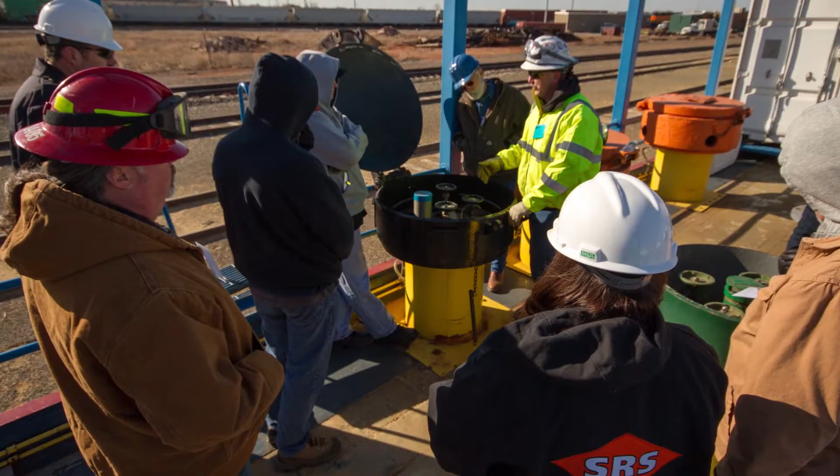As responders who may face chlorine-related incidents, and those who train them, you face many challenges. Your actions must combine a clear understanding of the properties of chlorine and the systems used to store, transport, and carry it. In an emergency, you must act swiftly, effectively, and safely. That is exactly what this program is designed to help you do. Our goal is to give you the knowledge and hands-on experience that enable you to respond to a chlorine-related incident in a way that is safe for your community, your team, and you.

My job involves some of the most exciting work we do in promoting chlorine safety, including our work with TRANSCAER and CHLOREP, the Chlorine Emergency Plan. When I earned my degree in chemical engineering at the University of Tennessee, like many new graduates, I thought I knew something about safety. Later, as a frontline supervisor and incident commander at a manufacturing facility, I learned that hazmat safety requires constant training and a clear commitment to safety by everyone involved in both operations and emergency response. That's why I'm especially pleased to be working with the Chlorine Safety Tour. It involves outreach to people like you who help keep us safe. The members and staff of the Chlorine Institute, thank you for your service.

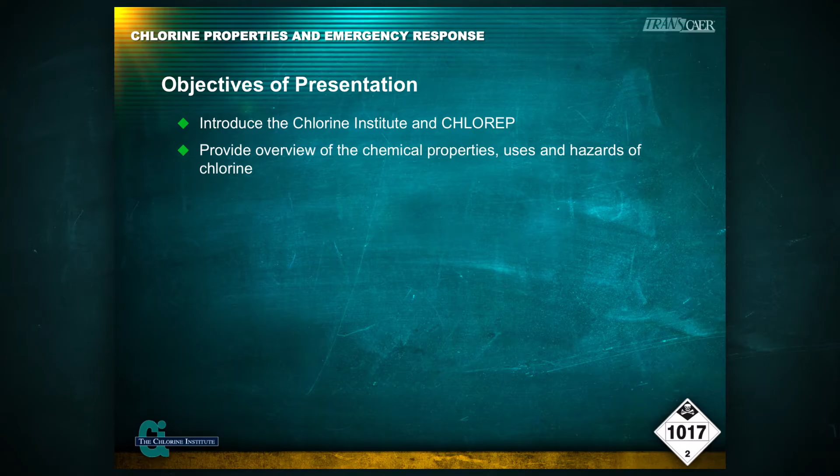The objectives of this presentation are to introduce the Chlorine Institute and the ChlorEP program, so you understand what that is and how that resource can be made readily available to you. It's also to provide an overview of chemical properties, uses, and the hazards of dealing with chlorine, and to provide an understanding of how chlorine properties affect how you respond to a chlorine emergency. Exposure treatment will be covered, along with security concerns when you go to a chlorine emergency site. We also want to provide an overview of the resources made readily available to you in case of an emergency. Remember, when you go into a chlorine emergency, you're not dealing with it alone.

First, I mentioned the Chlorine Institute. Well, what is the Chlorine Institute? It was established back in 1924, and it's a nonprofit technical trade association. It has over 200 members, and it's a worldwide organization, not just North American. It's focused on safety and handling of chlorine and what we call mission chemicals that are normally associated or produced with chlorine, all the way from production through handling, distribution, and final use.

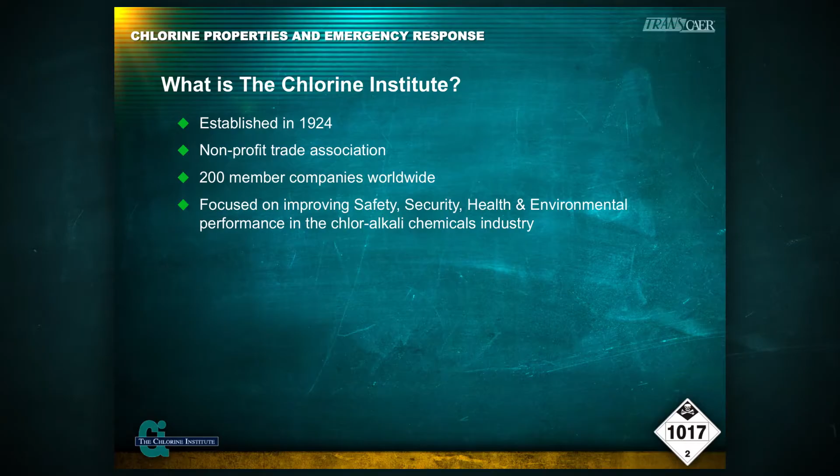Many of these pamphlets are available on their website for a free download. Those resources are available to you from any place you have access from a computer.

Chlorine Institute deals with what is known as the chlor-alkali industry, named because that's how chlorine is normally manufactured. Usually it involves introducing some sort of brine solution, either sodium or potassium, run into a cell and hit with a large amount of DC current, which fractures the molecular bond. It produces chlorine, sodium hydroxide or potassium hydroxide depending on which brine is chosen, and hydrogen. Therefore, you get the term chlor-alkali industry, indicating how it's normally produced in conjunction with sodium hydroxide or potassium hydroxide.

Chlorine Institute's accomplishments are many. One of the biggest things they did early on was to standardize all the chlorine shipment containers. Prior to 1929, manufacturers' containers were all different depending on who the manufacturer was. So the first really big change in the industry was to standardize those containers, which allowed us to develop capping kits for emergency use that could be utilized regardless of who the manufacturer or shipper was.

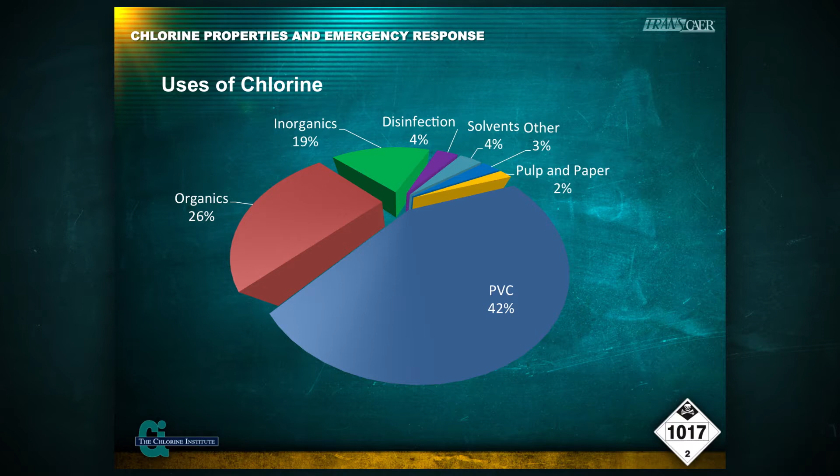But as I mentioned earlier, the bulk of the chlorine produced goes into the manufacturing of PVC. Chlorine and bleach are often used interchangeably by a lot of different people, but they're two very different products.

Chlorine is used primarily in industrial applications, and it's shipped as a compressed liquefied gas in pressure containers. It represents a lethal exposure risk, so it's considered a hazardous material. Bleach, on the other hand, is primarily used for household use or around personnel. It's an aqueous solution, which means it's in water, so it doesn't really have much inhalation contribution. It's basically a corrosive to humans, a very moderate irritant. So keep in mind these are two very different products that have very different response requirements.

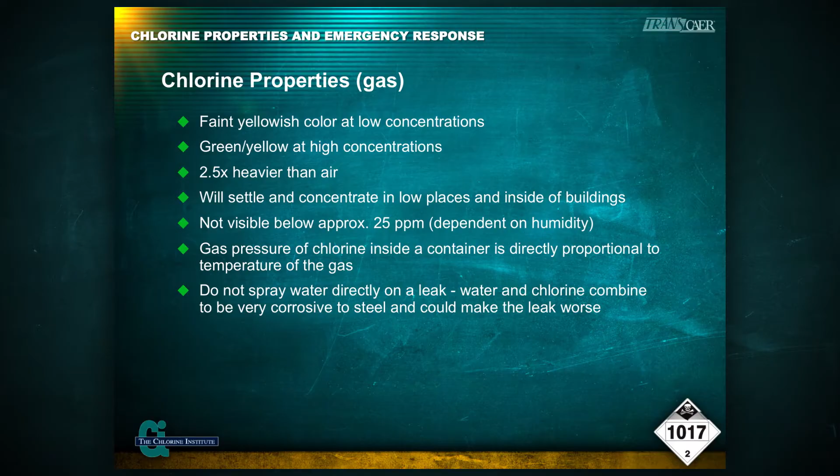Chlorine containers are all made of steel, at least the transportation containers. Hydrochloric acid is very corrosive to steel. If you introduce water on the chlorine source, you've now created a very corrosive environment that's going to make your leak much worse. Another problem you run into when you put water on chlorine is it reacts, and like most reactions, it gives off heat. If you heat the chlorine, it's going to vaporize even more, increasing the problem you have to deal with.

Another thing we'll talk about later in a slide: you really can't absorb much chlorine vapor into water. It's not worth the effort.

I said wet chlorine is very reactive and corrosive to steel. That doesn't mean there's liquid water in that chlorine to get it wet. It doesn't have to be anywhere near that level to be considered wet. Typically, we consider chlorine to be wet anytime it has a moisture content of 150 parts per million or more. Now, that doesn't sound like a lot of water, but you want to remember chlorine is typically shipped with a water content of 20 parts per million or less. Not unusual for it to be at 10 parts per million. That would be what we would consider dry chlorine.

Dry chlorine is actually compatible with most materials like carbon steel, and that's why it can be shipped in carbon steel containers. However, it does react violently with some metals like titanium, aluminum, and tin.

So you want to keep that in mind, that if you're responding to a chlorine leak, you don't want to take your titanium driver with you.

Also remember that chlorine reacts violently with steel at temperatures above 450 degrees Fahrenheit. That 450 degree Fahrenheit number was actually generated in a laboratory, and unless the steel is crystal clean, it lowers that reaction temperature very, very much less than 450. That's why most chlorine producers won't let chlorine get above 200 degrees Fahrenheit. They want to have a large buffer between it and 450.

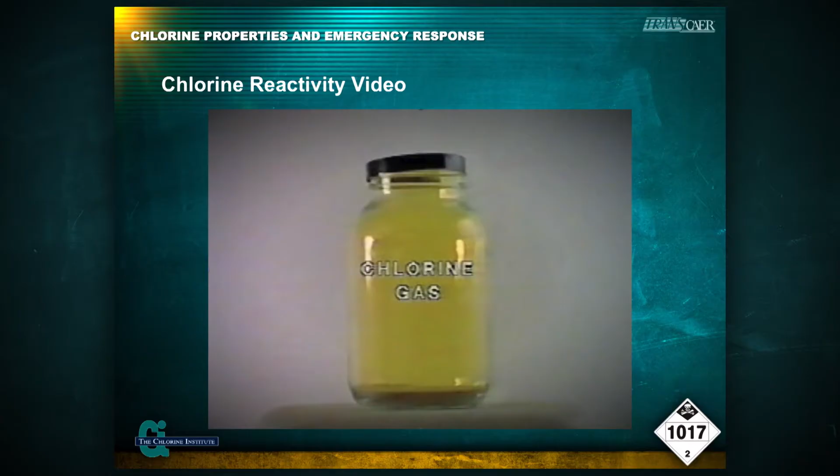Chlorine gas, as I talked about, is a yellowish green color. And here's liquid chlorine, it's an amber color, about minus 29.3 degrees. You'll see the vapor coming out of that beaker is so heavy it will barely clear the top of the beaker.

Wet chlorine is corrosive, as you can see in this real-time video being applied to a steel washer. As far as reactivity, this video here will demonstrate the steel wool and chlorine reaction.

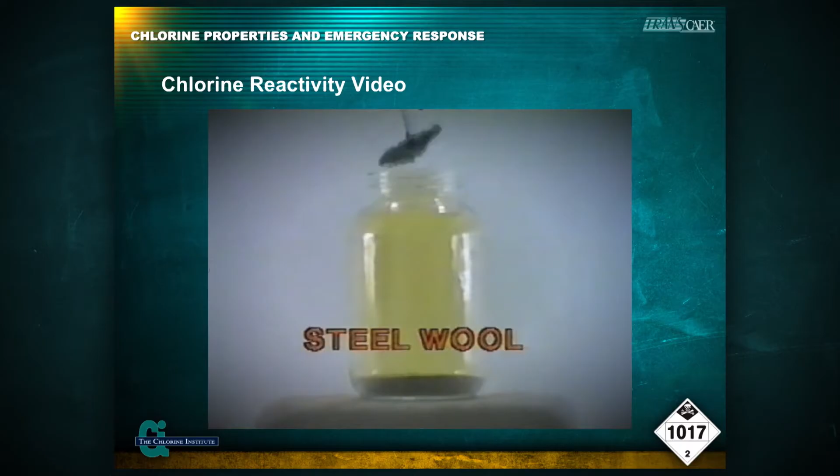The next video is grease and oil. As I said, chlorine is a very high oxidizing material. We test for chlorine leaks utilizing aqueous ammonia vapor. As you can see in the video, it's a rather violent reaction that gives off a lot of white vapor to clearly indicate where those leaks are.

You can actually smell chlorine at as little as half a part per million. You can actually find leaks of chlorine lower than that utilizing aqueous ammonia vapor.

Chlorine reacts violently with hydrocarbon oils and greases. For that reason, any lubricants that are going to be in contact with chlorine have to be fully halogenated greases and contain no hydrocarbons. Also, silicon-based greases and oils will react with chlorine. Detergents and soaps react with chlorine as well. It's one of the reasons also that we use aqueous ammonia to find chlorine leaks and not detergents and soaps.

Chlorine will also react violently with ammonia. That's one of the reasons we use it when checking for chlorine leaks. But we only use the vapor from the aqueous ammonia. We don't put liquid ammonia on chlorine leaks.

Finally, divided metals. We saw the video of the steel wool erupting at room temperature. Chlorine will also react with activated charcoal.

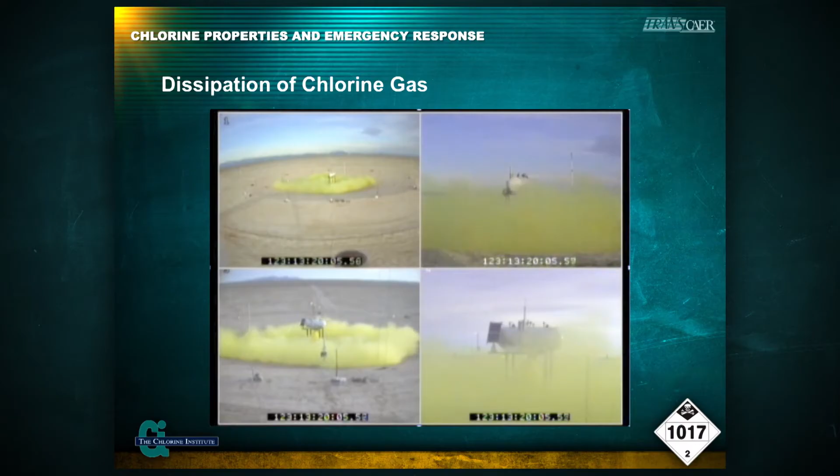Here you can see the chlorine escaping rapidly through the 2-inch ball valve on the bottom of the tank. But you'll notice, if you look at the elevation of the tank, it's barely rising more than about 2 feet above the ground. It's also pretty much staying within the confines of the dished out region around the tank itself.

At the 1 minute mark, approximately, you can see that the liquid is gone from the tank. At the 5 minute mark, you can see a fairly oval outline of a concentration of the chlorine vapor. At the 15 minute mark, it's significantly reduced, but it's still there. If you look at the 30-minute point, you can no longer see any chlorine vapor under the tank, although in actuality, it's very likely still above 10 parts per million, which was the IDLH for chlorine.

It's also interesting that this chlorine stayed at about 2 feet above the ground. To give you an idea how little of the chlorine raised much above that level, during one of the tests, a flock of birds actually flew over the test site and landed on top of the tank and sat there for a period of time. Even though there was a very lethal concentration of chlorine at the bottom of the tank, they showed no ill effects and flew off.

Now we're going to see a side-by-side comparison of a much heavier than air material, chlorine at 2.5 times, versus ammonia, which is only about half the weight of air. Even though both of these chemicals are considered poison inhalation hazards, you can tell by watching the video there's going to be a significant difference in how you'd respond and manage these emergencies.

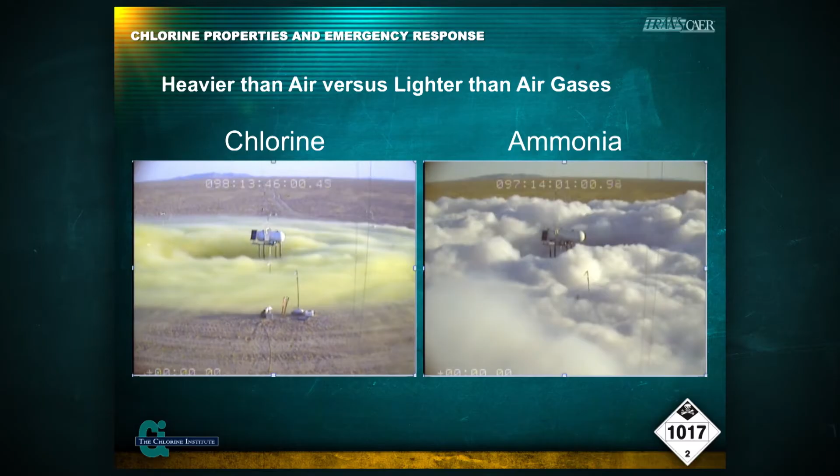The chlorine vapor virtually reaches the end of the dished area and pretty much sits there, whereas the ammonia vapor releasing has engulfed the entire viewing area of the camera, and you've lost view of the tank.

What are the environmental hazards when you're dealing with chlorine? Well, chlorine itself is not actually a naturally occurring element. Chlorine element is never, ever evident by itself. It's always joined up with some other molecule. It's way too reactive for it to remain in its state as elemental chlorine. Most of the time, it's actually tied up in a molecular bond with sodium chloride salt. As a matter of fact, that's how we actually begin the chlorine production process, with salt.

If you mix chlorine with water, as we talked about earlier, you will end up with corrosive hydrochloric acid. So you want to keep that in mind anywhere the chlorine is going to meet a moisture barrier, whether that's dew, fog, or just water.

Whenever you come upon a site where there's been a chlorine release, you want to look for evidence that there's been chlorine contact. One way that's evident is when you look at vegetation, you'll see bleach spots on leafy plants. Even though the plants look like they're under a lot of duress or stress, normally the plant won't die from chlorine contact and will fully recover later.

So what are the exposure limits for chlorine? Well, according to the American Conference of Governmental Industrial Hygienists, the threshold limit value for exposure to chlorine is half a part per million on an 8-hour time-weighted average. The OSHA permissible exposure limit is also 1 part per million as a ceiling.

The conference also says the threshold limit value for a short-term exposure limit is 1 part per million. What's the IDLH for chlorine? Well, it's 10 parts per million. So you see there's a pretty significant difference between the allowable exposure and the IDLH.

Is chlorine considered a carcinogen? No, it's not. Not by OSHA, NIOSH, NTP, or the EPA.

What are the clinical effects from an acute exposure to chlorine? Well, if you're in the neighborhood of 0.2 to 3.5 parts per million, that's considered odor detection. At 1 to 3 parts per million, you're going to notice mild mucous membrane irritation that can be tolerated up to 1 full hour. 5 to 15 parts per million, you're going to have moderate irritation of the respiratory tract.

Now, that term moderate used in that particular measurement refers to how rapidly you can recover from that exposure. Because I can guarantee you, if you're exposed to 15 parts per million chlorine, you're not going to consider it moderate. It's only moderate if it's somebody else being exposed to it.

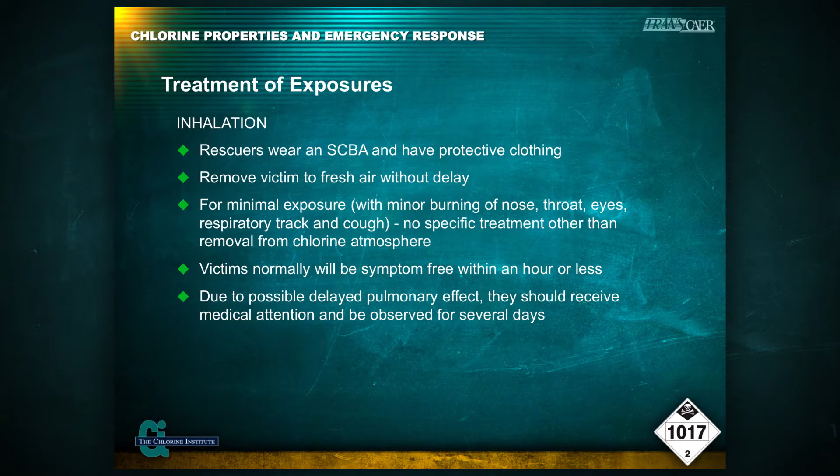Continuing with inhalations, if you've had a more severe symptom from a higher exposure limit, it will typically show up as tightness in the chest, dyspnea, and a persistent cough. The person will normally have a high level of anxiety, and that person's going to have to be treated with oxygen or other respiratory supportive measures because they're not going to be able to breathe normally. They're going to be fighting to breathe and bring air into their lungs.

You want to make sure you get that victim into fresh air as soon as possible and get medical attention as quickly as possible. You want to monitor the victim because they're going to be experiencing a lot of respiratory distress. You want to make sure and check that their airway is open because you can have symptoms of swelling in the throat that can interfere with the normal breathing process. You want to remove any contaminated clothing the person may have on because that will constantly re-expose the victim as the vapor continues to evolve off their clothing. You also won't be able to transport that victim in an ambulance until you get them cleaned.

For skin contact exposure, you want to make sure and wash the skin with plenty of water. This is one place where you actually want to use a lot of water. You want to get that off their skin so you can cease their exposure to the vapor as well as prevent future corrosion burns. You want to get their contaminated clothing off, wash the body entirely, thoroughly, and rinse it. And if they continue to have irritation after you've irrigated them sufficiently, or they have broken skin or blisters, they need to get medical attention immediately.

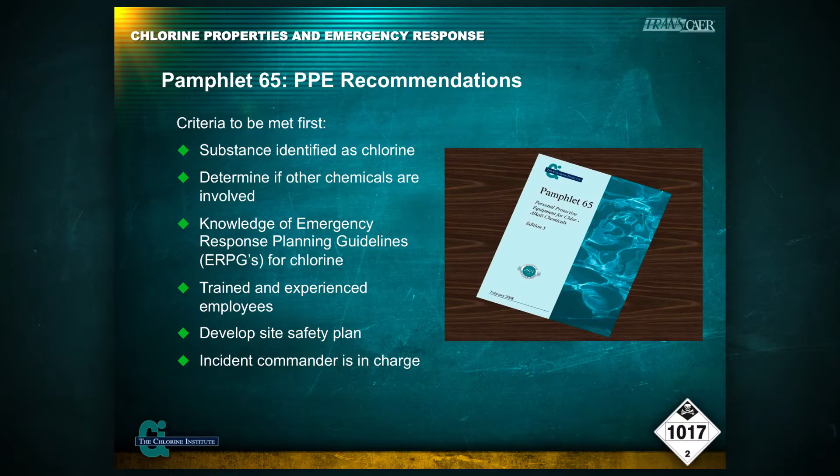Some of the considerations and decisions you have to make when dealing with a chlorine emergency: what kind of personal protective equipment are you going to have to wear to enter. You have to know exactly what state the chlorine's in, whether it's a gas or a liquid phase or some combination of either one. One thing you will have to have on, regardless of which phase it's in, is an SCBA that's under positive pressure. These guidelines are all spelled out in Pamphlet 65, which I mentioned earlier.

If it is a gas or vapor release, you should have on a level B suit that has self-sealing sleeves or taped sleeves. You want to make sure you don't go into confined spaces, though, if you only have on the level B suit with self-sealing sleeves or tape — it's not qualified for that. In a liquid, you want to make sure you're wearing an enhanced level B suit. You want to make sure you have a hood for head and neck protection, and thermal underwear should be worn, because, as I spoke about earlier, liquid chlorine is going to be at minus 29 degrees or less, so you're going to have potential for frostbite.

This slide is probably one of the most important things for first responders to remember: your emergency contact and resources. There are resources available to you when you're dealing with a chlorine emergency. Who are you going to contact? Call Chemtrec. Chemtrec will initiate the ChlorEP plan, and a ChlorEP sector team leader will be responding to you and making contact with you in a very short period of time. Chemtrec can also offer other valuable resources, such as an SDS sheet, so you can look at what you need to do in order to respond to a small leak, a fire, or an exposure. They can also tell you the manufacturer of the product and who the transporter was.

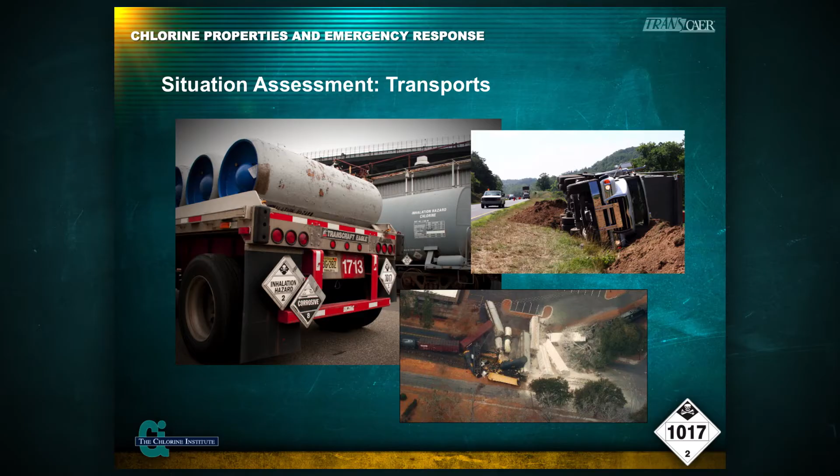Situation assessment can be significantly different when you're dealing with chlorine containers other than rail cars. They can pretty much happen anywhere — on any road, highway, or dirt road. They can be stored at a fixed facility, like a rural water treatment plant. It can be almost anywhere. So you want to make sure you assess the situation and determine what your avenues are for dealing with that release. You also have different kits available depending on what container it is, whether it's a 1-ton container or a 150-pound cylinder.

If you are dealing with a chlorine rail car, keep in mind that a loaded chlorine tank car is only about 80% liquid full. It has a 20% vapor head space to allow for expansion. The pressure in a loaded rail car is somewhere between 60 and 100 psig, depending on the temperature of the chlorine. The product temperature is going to vary in that range, from 50 to 80 degrees Fahrenheit.

If it's a residue car that's returning back to the manufacturer, it's going to have somewhere around 2,500 pounds of a mixture of chlorine vapor, liquid, and air. But that car is going to be pressurized somewhere between 150 and 275 psig. The reason you have higher pressure in a residue car than on a loaded car is that most chlorine cars, when offloaded, use a pad gas to push the liquid out. So the remaining pressure is that pad gas in the car.

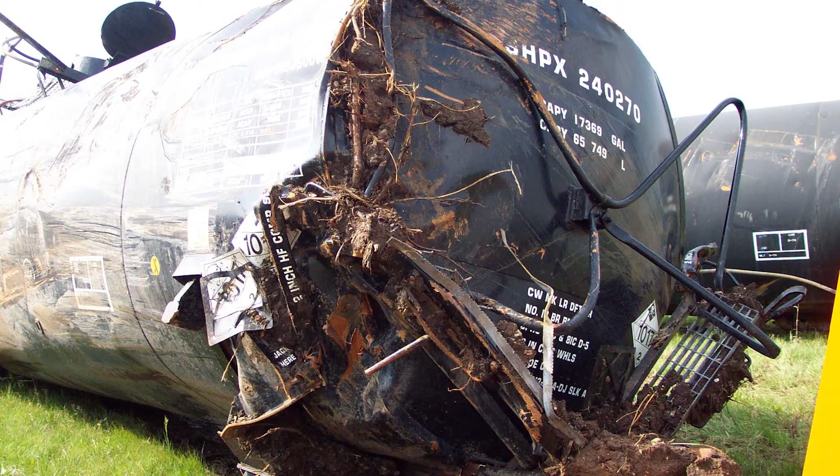Also, here on the bolster, the cradle that this tank car sits in, you don't see where it's welded to the tank itself. You'll see a rain bonnet over it right there, another indication. Again, that's important to know when you're doing your damage assessment. You're going out there to find out what's wrong with this car, because you could just have a dent or a gouge, and it could just be the outer shell itself, not damage to the tank.

When we look at this and get our reference points on this tank car, we have an A end and a B end of the car. The B end is where our brake is, and there won't be a brake on the other side of the car. So everything is referenced from the B end of the car, with a right side and a left side. This way, when you do your damage assessment and call back to your command post, everyone is on the same page referencing where your damage is and what you're seeing.

Tank cars are attached to each other through couplers. Hazmat tank cars use double shelf couplers, so you'll see they're connected in a way that, in the event of a derail, these couplers don't come apart and gouge into the other tank and damage it. You'll notice on this tank car there are no fittings or valves on the bottom. All your valves and fittings are on top of the car, inside protective housing. Here we have the A end of the car.

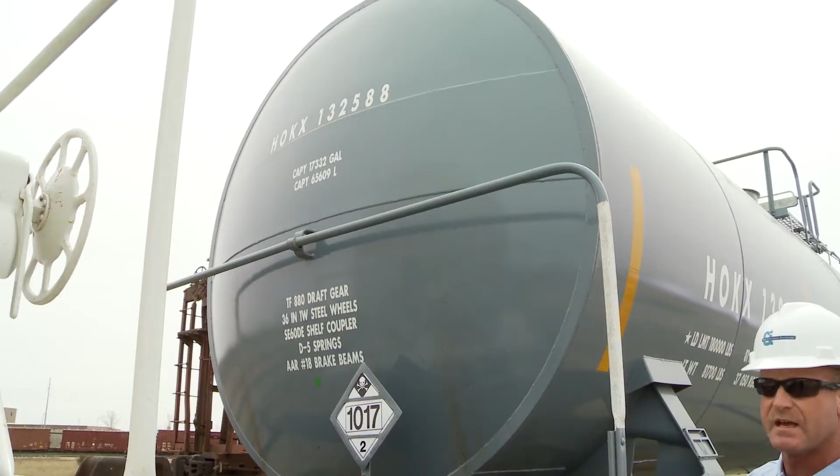You'll notice the absence of the brake wheel, which distinguishes this as the A side of our car for our reference point. Also on the sides of the car you'll see some stenciling and marking, and Tracy's going to explain what those mean to this car.

This number you see right here is the identification number for this particular tank car. This number was applied to this car when it was built, and it will stay with it until the last of time. In case of an emergency, this number could be called in and they could find out who the shipper is and the product that is in the car. Looking at the tank car on the side, the identification number will always be on the left side and on each end of the car. So it's very important to know where that's at.

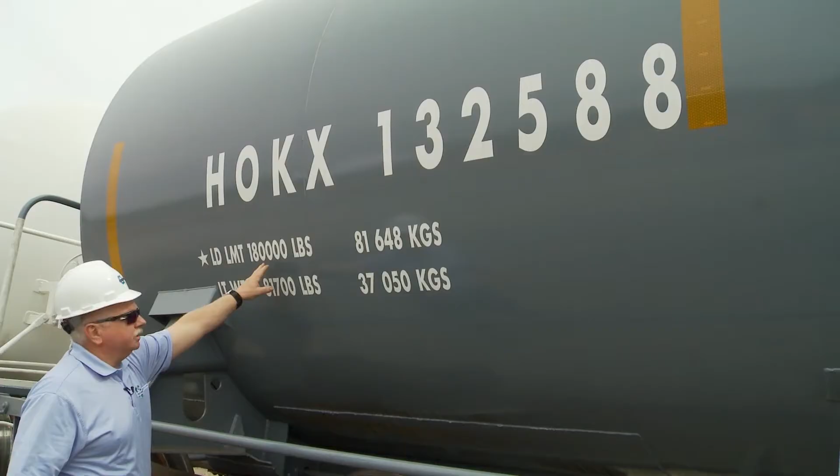Below it is the load limit in poundage of product, 180,000 pounds, usually about 170,000 pounds of product is what they will put in it, as well as the light weight of the car.

As we proceed down the car, as you notice, it's got the markings of the insulation, 2 inches of glass wool blanket over 2 inches ceramic fiber. That's 4 inches behind this jacket, so you have at least 4 inches of space between the outer shell or the jacket and the inside tank.

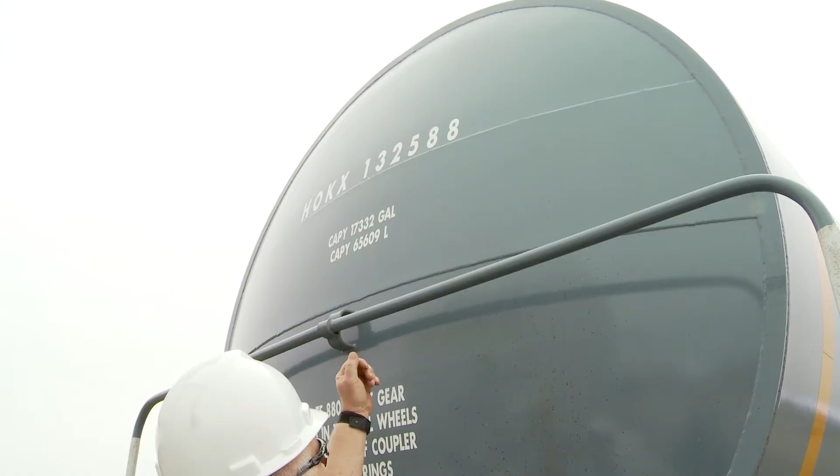We've also got the identification marking of the car on the end. And on the end of it, you see the capacity in gallons and in liters. 17,332 gallons, usually it's about 14,900 gallons. They leave some outage inside the car. That will be on the other end of the car, but they are always on the end. You can see the capacity in gallons and liters.

If you'll notice here, this is the placard for this particular commodity, which is chlorine 1017. It's a class 2, which is a compressed gas liquid, and it will be on all 4 of the sides per DOT specifications.

As we proceed down the car, if you'll notice right here, this is the emergency number to Chemtrec, 800-424-9300. With this number, you could report if this car was in an accident or leaking or what have you. You could call that number, give the identification number that we talked about earlier, and they could contact the shipper and get emergency personnel on their way.

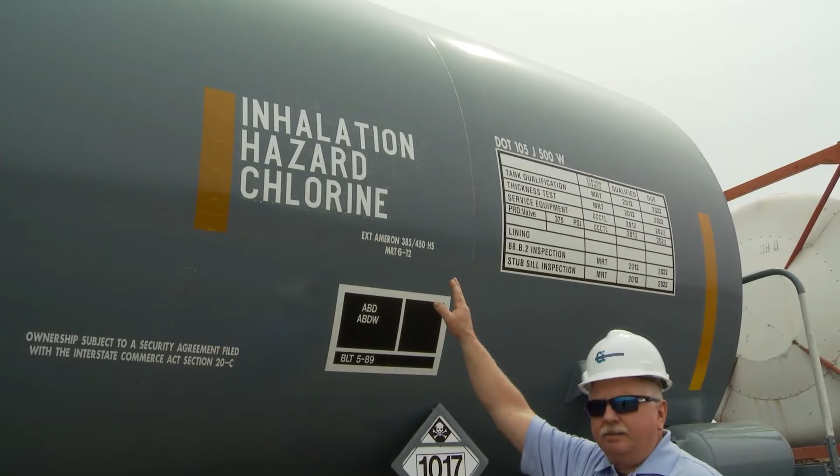This brings us to the right side of the car. And if you'll notice, it has the inhalation hazard, chlorine. You will see that on Chlorine Cars stencil. You will see a built date, which looks like an old-fashioned type chalkboard, and it will have the built date of the car when it was built. Again, you will see a placard on the side, all 4 sides of the car.

Okay, we're looking at the car specification number. This is a DOT, which is the governing body of this tank car, and it's a 105J500W. The 105 designates the type of car that it is, which is used in chlorine, J for jacketed, and then 500 is the working pressure. After 2012 is the next generation car, and it'd be a DOT 105J600, or 600 pound working pressure. That working pressure is what that car could be working at.

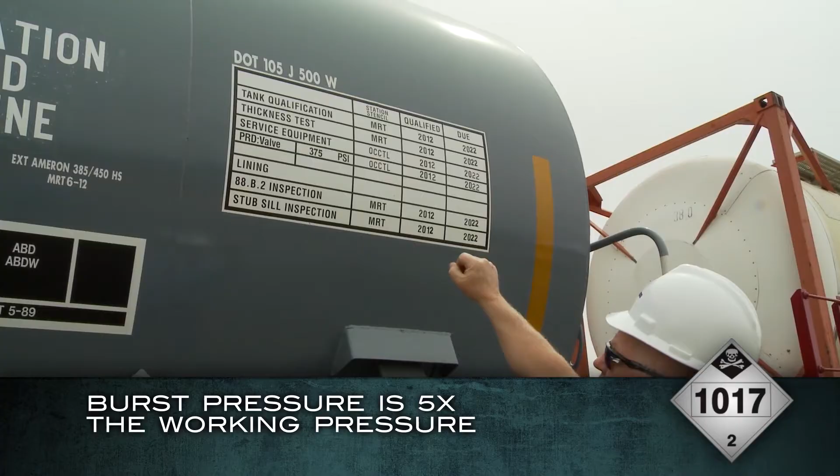However, there is a burst pressure that is 5 times more than that, so that's a pretty good safety factor. When you come underneath that to the qualification outline, it says when the tank was qualified last or tested, the tank thickness test to make sure that there's no erosion on the steel on the inside tank. If you notice the service equipment, the PRD, that's the pressure relief device, it is set at 375 PSI. So that is below the tank working pressure of 500 pounds that you see on the DOT number at the top. There's quite a lot of safety factors built into these cars.

We are now at the B end of the car. As you can see, the brake wheel. Once again, the identification marking is at the top. It's on the end. We talked about it being on the other end, on the A end, and on the left of the car on each side. As you will notice, once again, it has the capacity in gallons and liters on this end of the car. Again, the 1017 placard, it will be on every side of the car.

Now, Terry will go over the protective housing on the top and the valving and how they work.

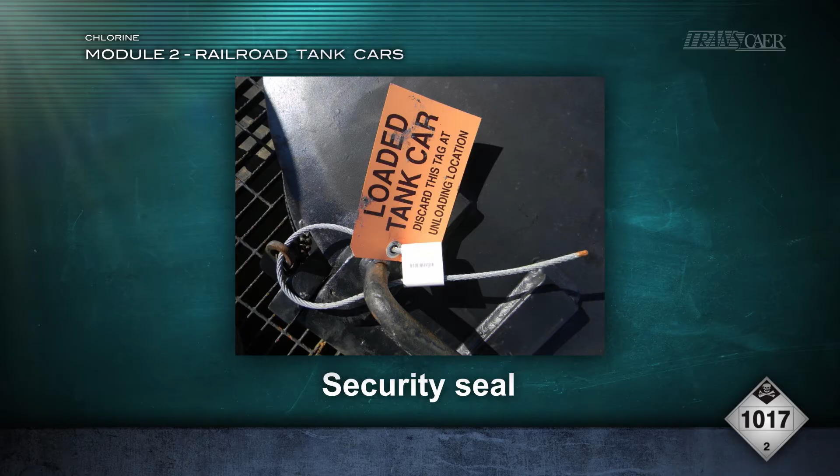Now that we're on top of the car, we want to talk about the protective housing. As responders, whenever we get on top of the car, we want to make sure the seal is intact. The seal is always placed on the car after the car has been loaded. We want to make sure that seal has been intact, is still intact, and that we have not had anyone cutting the car prior to us mounting on the car.

The liquid valves running lengthways will have an eduction pipe located underneath the pressure plate, right under the angle valve itself. On the pressure plate, attached to the bottom, will be what we call an excess flow valve. Excess flow valves on most tank cars are 15,000 pound per hour excess flow valves. On the bottom of the excess flow valve is an eduction pipe connected to it that travels down inside the car within 2 inches of the floor for liquid removal.

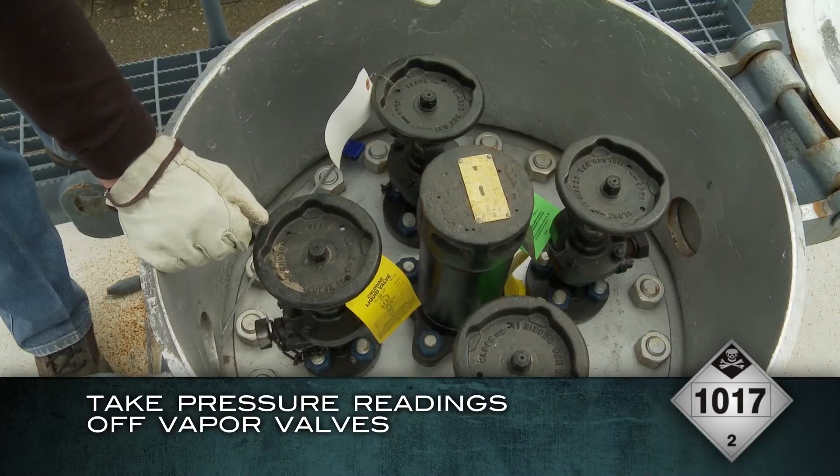The vapor valves will not have eduction pipes or excess flow valves on the tank car. As for the pressure relief device, again, it's set at 375 PSI. When coming up on top of the tank car to take pressures off the tank car, we usually take them off of the vapor side so that we get a pressure reading before trying to fix something or apply the kit.

The next generation protective housing that you'll see, built after 2012, is on some of the cars that are getting more prevalent nowadays. You'll see that it has 3 angle valves with the safety relief device offset and not in the center of the protective housing itself.

Prior to releasing the car or shipping the car back down the rail, we want to make sure that these things are intact. All 4 plugs are located inside the valves and they're secure and they're tight. We want to also make sure that the tags are still on the valves if we need those paper tags. Also, very important that we take the returning seal, the RA seal, and place it on the car itself once we have closed the lid.

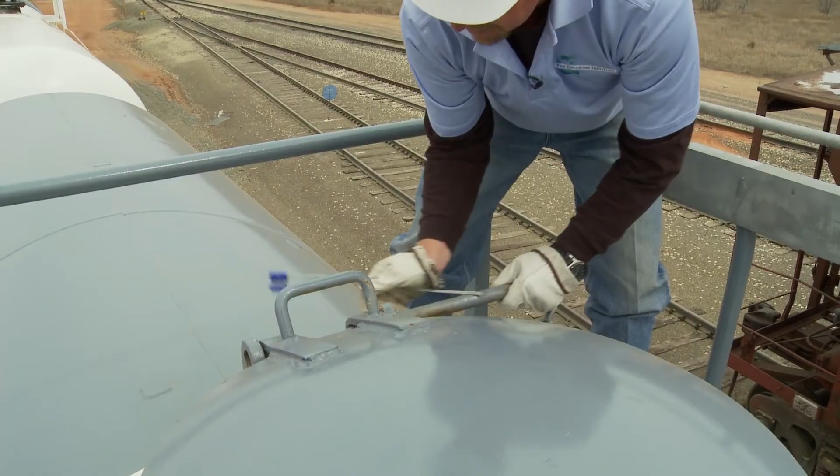Replace the pin for the lid, and then we want to reseal the car, and then document or record the number on that seal, and then your car can be released.

U.S. railroads transported over 1.7 million shipments of hazardous materials last year, and 99.96% made it to destination without incident. Railroad is an extremely safe way to transport hazardous materials, and very few times do we experience problems in that supply chain. When accidents do occur, it's important to understand that as a responder, you're not in it alone. The railroad has many different resources that we will send to the site to help you deal with any type of emergency response that you have on the railroad.

Some of the things I want to cover in the objectives of this are to talk about some of the things you'll need to do, which is contacting the railroad, assessing the situation, and being able to engage the resources that are available to you.

It's important when you're responding to a railroad incident that you call the railroad. It's also important that you pre-plan before you have an accident in your jurisdiction or city to understand whose railroad might be running through your area. So when you have a call, it could come through 911. The railroad may or may not know that there's an incident occurring right there. So what you can do is call the railroad, explain that you are responding to the incident, and then give them all the pertinent information about that incident, like where it is. How are they going to know where that incident is? You need to explain it to them.

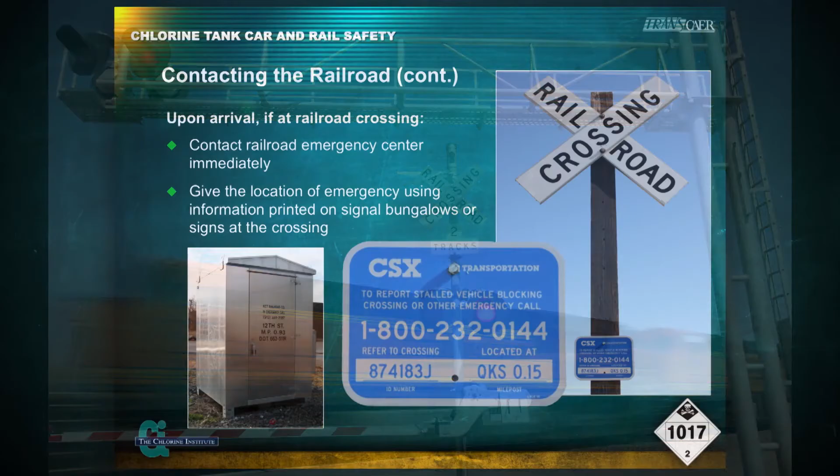Around those crossings, there will be a silver small building called a signal bungalow, and on that building there will be information telling you whose railroad operates that crossing. It also has a 1-800 emergency response number and a DOT crossing number, which is a serial number specifically assigned to that crossing. There's only one crossing in the United States with that number, so when you call in, you can identify the crossing by that serial number, giving the responding railroad exact information of where you are.

It will also say M.P. with a number, which is the milepost number. That number does not coincide with DOT highway or interstate markings; it's a sole milepost marking used only by the railroad, even if the track is adjacent to an interstate or highway. So when you have an accident at a grade crossing, it's important to look for all these identifiers and find this information.

If it is a railroad crossing that does not have automated arms and flashing lights, look for a blue sign on what we call the crossbucks, the X symbol that says railroad crossing, which has all the pertinent information of the railroad. It will have the 1-800 number, your unique DOT serial number identifier, and the milepost. Those are important features to find.

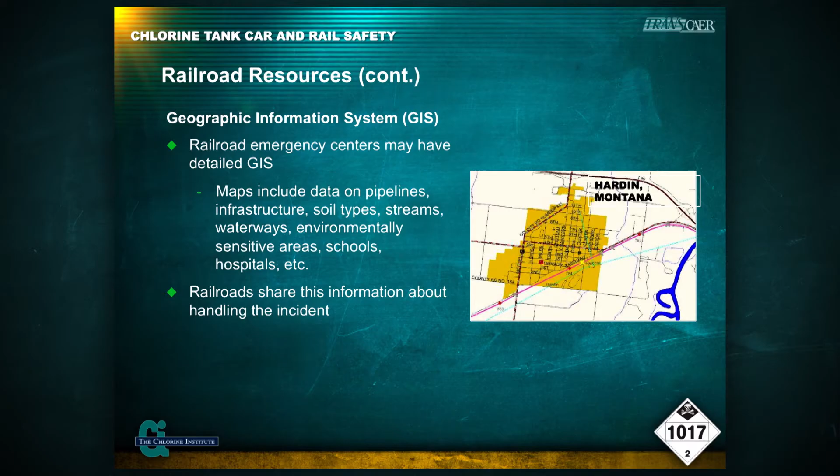Many railroads have geographical information systems, or GIS systems, which are overlays that can be put on a map showing sensitive environmental receptors, water intakes for communities, schools, hospitals, pipelines, and underground utilities. When you're talking to the emergency response center for whatever railroad you're working with, they can really help you, especially if you don't have that information readily available, telling you about things like water receptors or sensitive environmental receptors.

Railroads also contract with independent contractors and government agencies that can help with plume dispersion modeling if there's a suspected or verified release of chlorine. These contractors have good computer programming methodologies that use real-time meteorological information to give you very good plume dispersion modeling, helping you anticipate what the plume could look like or how it will progress through your community.

Some resources the railroad will provide to an incident include our engineering department, mechanical department, and transportation department. We will also supply hazardous materials contractors, security, environmental contractors, and industrial hygiene contractors. It's important to remember that when responding to a hazardous material incident on the railroad, you use all the resources available. When assessing the situation, it's important to do so from a distance, using your binoculars to see the conditions you have.

Do you have visible signs of a leak? That's going to be vapors, smoke, or liquid coming out of a car. So you want to visualize that from a safe distance first.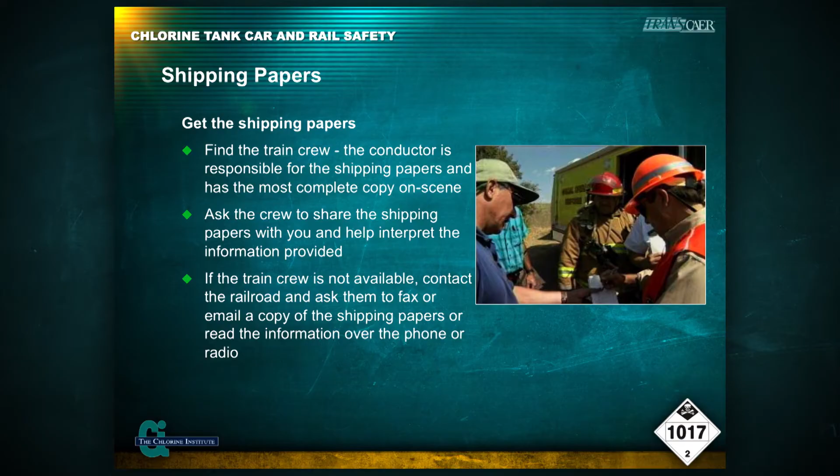If you have a derailment, one of the easiest ways you can start is to find the cars that you can identify that are in the upright position. Find those cars on the train list, and then you can work from there to help you figure out what part of the train has derailed.

Some of our trains carry 100 cars, so trying to count cars from the locomotive to the rear of the train can be very burdensome. So what you want to try to do is find the cars that are upright, go from there, and that'll give you a good spot on that consist to start working and trying to identify the cars that have actually been derailed.

All right, so let's look at the shipping papers. Once you've obtained the shipping papers from the train crew, you can identify your hazardous materials cars in those shipping papers. Those cars are in sequence, and the cars will be either listed from the front of the train to the rear, or from the back of the train to the front.

If the cars are listed from the back of the train to the front of the train, it will be noted on the top of the consist. Okay, so it's important to understand which direction that you're looking.

Now, that consist will tell you the hazardous materials cars, and they'll be identified by a box with asterisks around it, and it'll say hazmat or give you another type of indication that it's a hazardous materials car. In there you'll find your quantities, your hazardous material, your packing group, your UN number associated with that, your shipper, and consignee.

We'll look at this shipping entry. It's for a chlorine car that has 166,500 pounds of chlorine. You can see here that it shows the UN 1017 placard that would be on the side of the car. The class is 2.3, which is compressed gas, poison. And you can see where the emergency response numbers are.

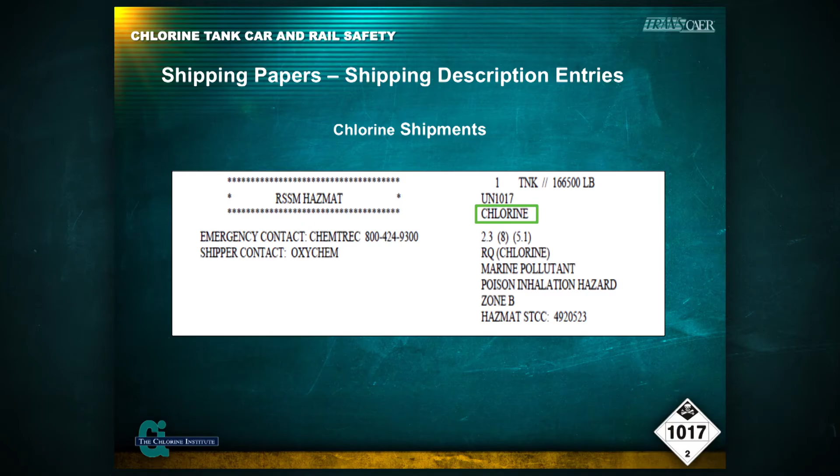So what this does for you is when you're looking at that car, maybe it's either leaking or has been derailed, you can verify that information because you're going to look at your unique identifier number that's been talked about earlier today, the letters and initials on the car, and then you're going to look for that placard to make sure it reads the same thing as the placard on this manifest. You'll start looking at these different pieces of the puzzle to make sure that they're all making sense, that the car you're looking at is actually the car on the manifest that you're reading.

It's very important to understand that the car that you think you're looking at is actually the car that's listed on the manifest, and that the product is the right product, and you're not mistaking one car for another. The next entry talks about a car that's got residue last contained.

It's got the same information, but it's important to see that the residue last contained is on there. When these cars are residue last contained, it does not mean that they're empty. It means they have residue, so they can have 7% of what the load is left in them. So when we respond to those type of cars, it's very important to know that you're not dealing with an empty car. You do have a residual amount of product in those cars.

At the back of the consist, we have emergency response information. This information is not an MSDS or SDS. This information is information that you can read about each one of the hazmat shipments in the train, and it gives you some good general information to go with. It'll give you visual clues. In the case of chlorine, it'll talk about it being a greenish-yellow cloud.

That will help you identify when you go to a response to start looking for that kind of material. It'll give you the weight of the product, and tell you if the vapors are heavier or lighter than air. That'll help you position your equipment or know where to look with your air monitoring devices.

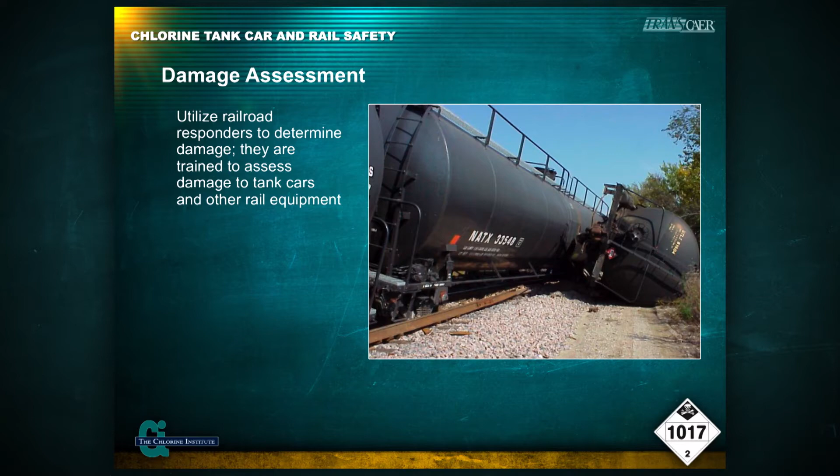When we talk about damage assessment, it's very important for us to understand it. Damage assessment needs to be done by people that are trained and have experience. True damage assessment cannot be done with a pair of binoculars from a distance. It needs to be done up close and personal with that rail car. Responders need access to the site so they can do proper damage assessment, because doing it from a distance just doesn't work.

So here again, as a responder, you're not in this deal alone. We have people coming to the site to help you do damage assessment, and they've got a lot of experience and training. When we look at damage assessment, we look at all kinds of things that play into the equation: when the car was built, the type of car we have, and other conditions like train speed.

And even the geographical terrain that we're in. A derailment in a swamp can be a lot different than a derailment in a canyon, and the damage that's done to the car. So those are some of the things that we look for.

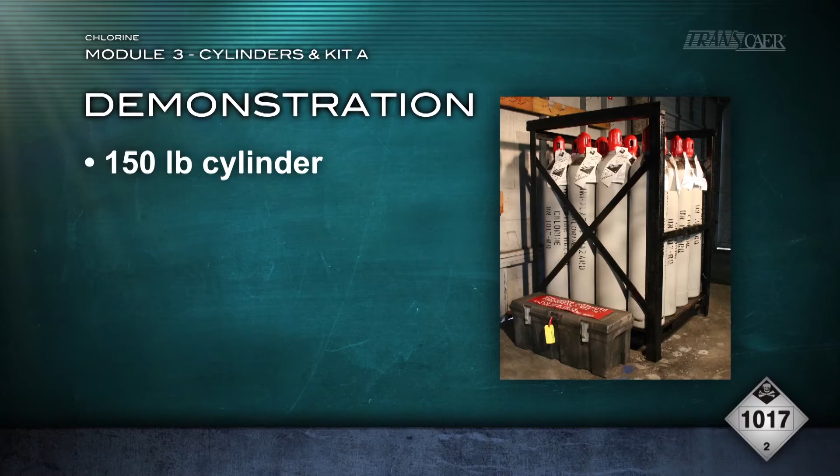Today, for Module 3, we're going to be discussing the chlorine cylinder and also the ton container. We're going to discuss the A kit, for the cylinder, and the B kit, the emergency capping kit, for the ton container. Throughout the segment, I'm going to focus on 3 major elements: the cylinder proper and its characteristics, where we'll get into specific details; then the valve and its properties, where we'll pay a lot of attention to typical leak points, because a lot of times the capping kit should be used as a last means of defense, since typically what we find is that the valve is just cracked open. I'm going to demonstrate that throughout the segment.

And lastly, if we do need to apply the kit, I'm going to demonstrate how to properly apply it.

There are 3 types of cylinders. The 150-pound cylinder, as we see here today, is the most common. But there are also 100-pound cylinders, slightly smaller, and a third that's not as common, a 20-pound cylinder. The 20-pound cylinders are mainly used in the pool industry and aren't as readily available throughout the rest of the industry. The 150-pound, however, is mainly used specifically for water treatment facilities.

The type of cylinder is a carbon steel cylinder. The DOT classification for the cylinder is either a 3A480 or a 3AA480, and all the information can be found on the neck ring. It's very important to know that.

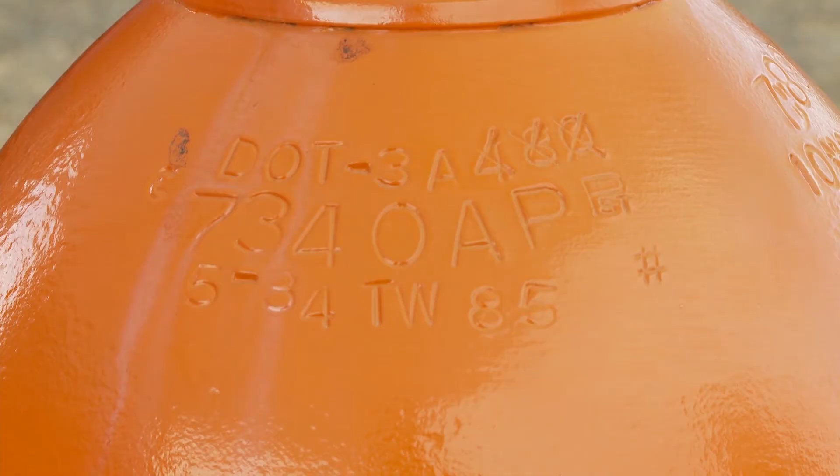Color itself is not a good indication of the contents within the cylinder. Please never rely on the sole color as your last means of defense to determine or identify if this is really a chlorine cylinder or not. The one today is obviously a training cylinder, but there are blue cylinders, gray cylinders, red cylinders. It all depends on the actual supplier and their preference.

We'll talk about the weight. For a 150-pound cylinder, which is the tallest cylinder, an empty weight typically is between 90 and 100 pounds. So without 150 pounds of chlorine inside, it's a pretty heavy vessel in itself.

Some of the other markings you will find would be the test criteria for the cylinder. Once every 5 years, each cylinder has to go through a Department of Transportation, or DOT, requalification. Within this, the cylinder is filled with water—that's one of the test methods—and it's charged with air up to about 800 pounds of pressure. What you're really doing is testing the elasticity of the steel. You want the steel to actually expand and contract, which is critical. Once requalified, it receives a new test date, and all that data is found on the neck ring.

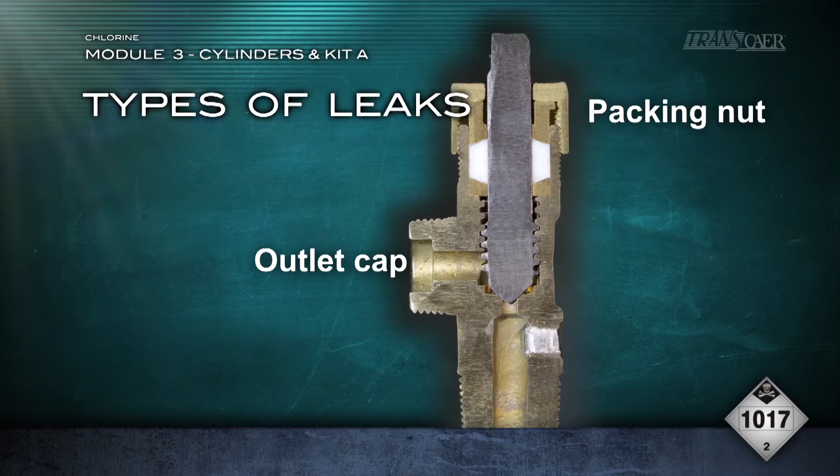Another leak point is through the valve outlet cap. Again, with the A-9 wrench, we could tighten the cap and see if that works. With the valve cap on snug and tight, we could open and close the valve stem to try to dislodge any material that may be sitting on the valve seat, and then check it again with aqueous ammonia. It's very important, anytime you're dealing with chlorine, that you only use aqueous ammonia to test for leaks, not the liquid.

Another leak point is at the threads from the fusible plug itself. It could be the fusible plug. The fusible plug is designed to melt, that's its purpose. Unlike a ton container, which has 6 of these fusible plugs on the vessel itself, the cylinder doesn't have that. We already discussed it. So this is the only source of a pressure relief device for the cylinder.

Now, unlike other pressure relief devices that are spring-loaded and operate on pressure alone, this doesn't work that way. It operates by temperature. So for example, if the cylinder happens to be near a heat source such as a fire, the fusible plug will melt between 158 to 165 degrees Fahrenheit, releasing the pressure, because as heat builds up, pressure builds up inside the cylinder. Instead of a catastrophic failure, the link will melt and release the pressure.

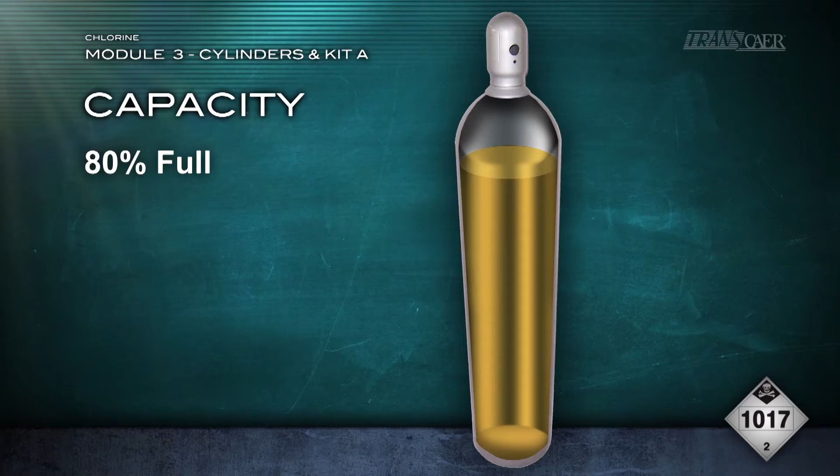Now that leads into the capacity of a full cylinder. A full cylinder is considered to be 80% full, that's what we consider full. The other 20% space is left there intentionally by design for expansion, since as temperature increases or decreases, so does the liquid inside the vessel. Typically for a 150-pound cylinder, if we convert that to gallons, that 150 pounds of liquid chlorine is roughly about 12 gallons of elemental or liquid chlorine.

Finally, the other leak point on the valve would be at the threads of the valve and the cylinder neck. I do not recommend that we retorque or tighten the valve into the cylinder if we find the leak source is at the threads. There are tools in the kit to do that, but it's a more specialized event, and the additional training a person would need is to make sure he checks the condition of those threads.

We just don't take it for granted that if the leak point is here, the threads on both the valve and the cylinder are in really good condition, because the last thing anybody wants to do is tighten the valve further into the cylinder and then end up with the valve in one hand, the cylinder in the other.

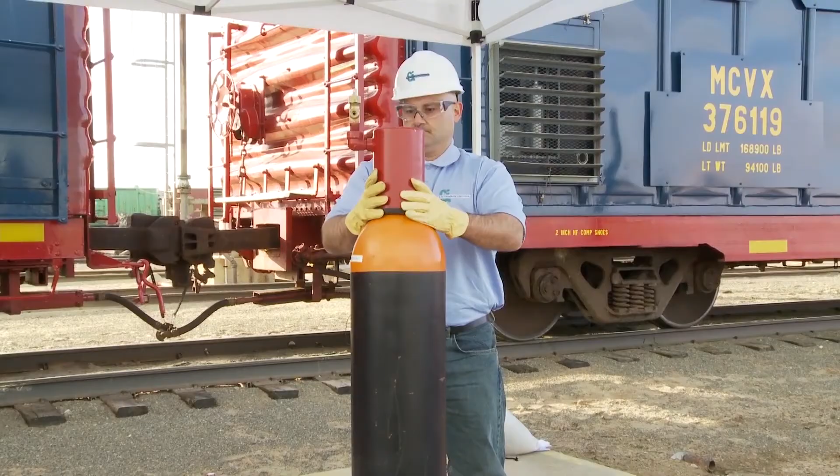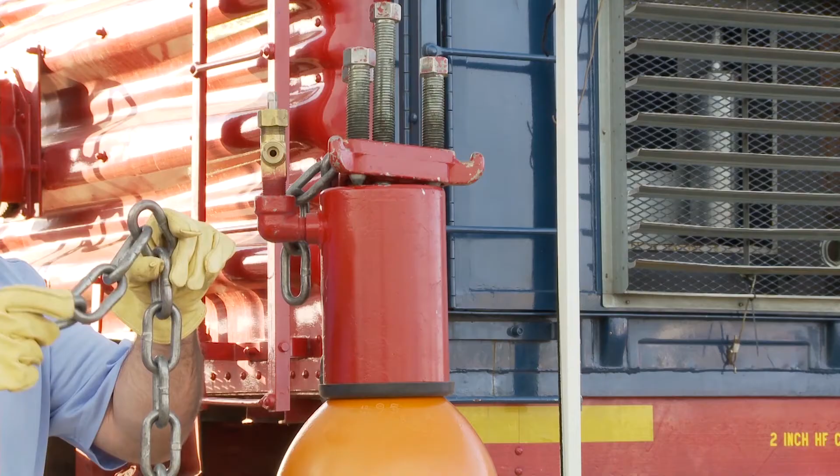Try to keep the vent valve opposite where your work area is. It's important to keep the chains as straight as possible. And one of the tricks is to count the excess links so you keep them all the same as you go around through all three.

You would twist the center bolt only, and this is going to take up the slack of the chain. If you try to work with all 4 bolts, you'll never get it centered. So the center bolt already did its job, and now I'm going to finish the compression using the remaining 3.

As you notice, the 3 are tight, but the center one is loose. That's okay. You would then close your vent valve. At this point, you want to tighten the bolts just enough to stop the leak.

You do not want to over tighten the bolts, because there's enough torque to where you can cut the gasket, and then you would have to start all over again. So we would wait about 5 to 10 minutes, and then we would go back and check using aqueous ammonia to make sure that the leak is contained.

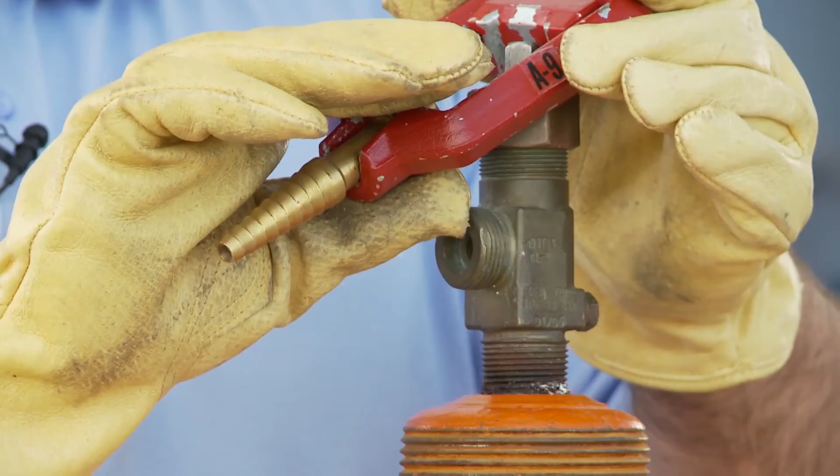It has a gasket, and you would just insert that like such. A hose could then be connected or inserted into the end, and it would typically go into an alkali solution, so a weak caustic or some kind of bicarbonate solution.

In the event that the valve stem or the valve itself actually blows out of the cylinder, very rare, but this kit does contain components to correct that. So part A3 would be used if the valve stem blows out and the valve body remains intact, and you would just insert it and you would tap it using a hammer.

And if the valve itself is removed for some reason from the cylinder, there's a part A4, and it would serve the same purpose. Utilizing the hammer that's within the kit itself, you would just tap it down, and it would replace the valve.

Next, we're going to discuss sidewall leaks. Sidewall leaks do happen, but what's important to remember is that there is a device, number 8, within the A kit that will contain the leak. It's important to note that the amount of pressure applied on device 8 follows the golden rule of thumb: you only apply enough pressure to stop the leak. Because if there is a sidewall leak, chances are the actual cylinder wall may be compromised, and the last thing we want to do is collapse the wall and introduce a bigger leak.

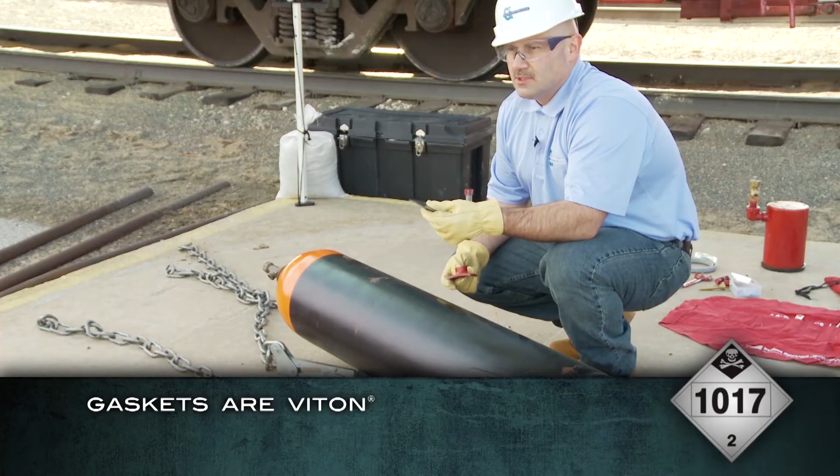The leak is at the 12 o'clock position. There's a gasket, and it's very important to note that the gaskets used for chlorine emergencies are made out of Viton. It's important that the material of construction is Viton -- that's what's within the A kit itself. For SO2, some kits actually have EPDM gaskets, but they're gray in color; Viton is black. Part 8D, which makes up device 8, has a contour shape to it, and it's important to apply that with the shape of the cylinder itself.

It's easier to set this apparatus up just near or adjacent to the actual leak. It's harder if you try to assemble these components directly over the leak, because that pressure may blow out your gasket. It just makes life more complicated -- life's complicated enough.

Now you would take up some of the slack, just make it slightly hand tight, because you still want to maneuver this over your leak point. By pinching the four corners, you can hold the gasket and device 8B together, and you would just slide it over the hole.

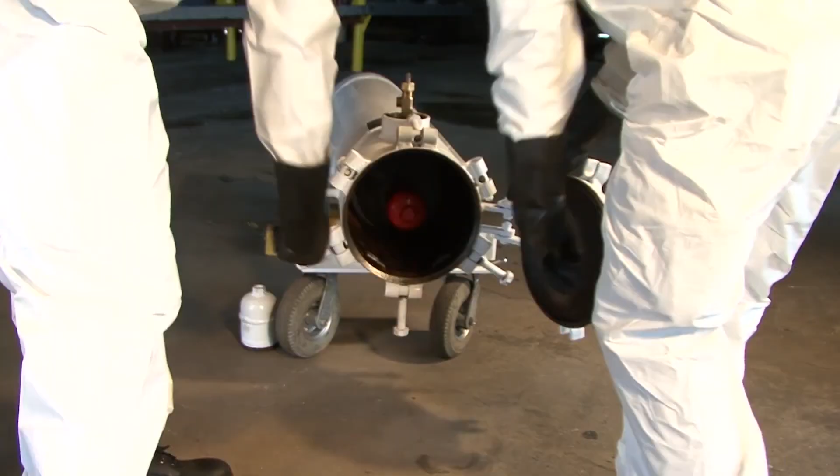Earlier we had discussed the salvage vessel, or recovery vessel as it's known. The recovery vessel is a particularly important piece of equipment when you have a situation involving a bottom leak. It's very easy to just slide the cylinder inside the vessel and close the doors, and the incident is basically mitigated. You would then contact a supplier, and that vessel would be taken over to the supplier and the cylinder evacuated at that point.

One of the changes adopted this year is a new variation to the A kit. While you may be very familiar with the A kit of the older design, we do have a new design adopted by the Chlorine Institute that looks just like this. Instead of having to put your top yoke on, your chains basically hook right here, making it very simple to operate.

Basically, you hook all the chains on there, and instead of having to line them all up together, they're all independent of each other, and you can tighten it to get a nice even seal. Make sure you've got a clean link. Once you have your chains hooked on there, you can independently adjust them. One of the big features is it goes up and down on the threaded rod to make it nice and tight. It works with your standard wrench.

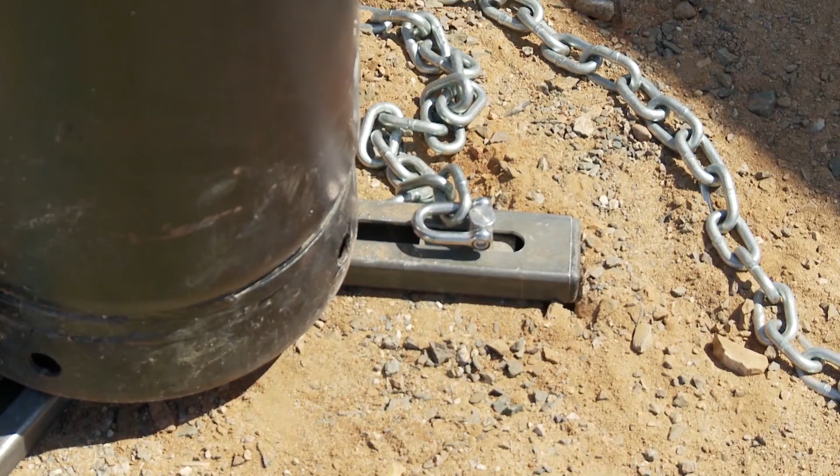You also have adjustments that let you get it nice and tight. One of the advantages to this chain is if you wanted to put it on a short cylinder, it will still work on the short cylinders, as well as 100-pounders and smaller containers than that. That is a big advantage to this new generation kit.

Another change in the newer kit is the side patch. Historically, you put the square patch on there with a chain, over tightening the chain. When you have a pinhole in a cylinder, you could have the possibility of line corrosion, which would look like a bathtub ring inside the container, and you may see a pinhole there. In this case, one of the big changes instead of the chain is using a strap. The strap will disperse your tightness over a bigger area than just the chain.

One of the changes is the gasket design. It's about 3/8 thick, and you have a little cup in there. That little cup will allow you to place it over and disperse some of the pressure.

Simple hookup. Instead of having to use a wrench, you have a knurled knob where you can just turn it by hand, and stabilize it with these two little stabilizing knobs.

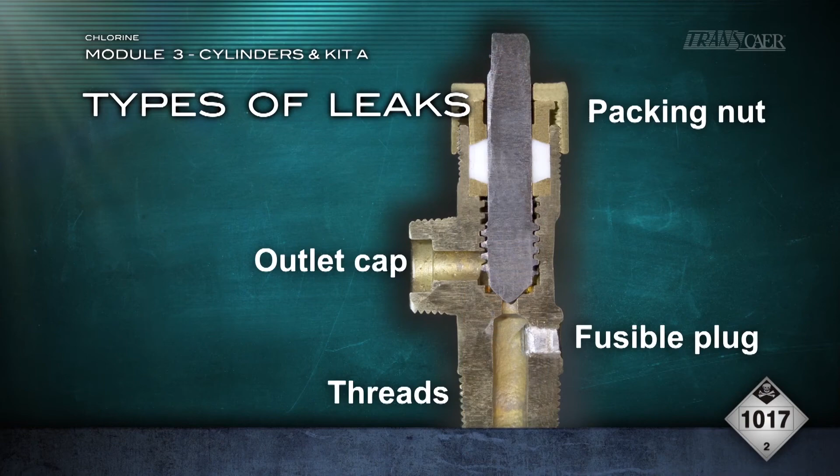But please always remember that help is a phone call away - whether it's the supplier, and we discussed how to identify some of the markings or numbers on the cylinder itself. You could also call CHEMTREC, and through CHEMTREC, the Chlorine Institute and the CHLOREP network would be activated to assist you. So you're never really by yourself.

I'm going to talk to you today about the ton container, very common in the water and waste treatment industry, as well as the emergency B kit, which is used in the case of a leak on a ton container itself. The ton container is about 82 inches long, 30 inches in diameter.

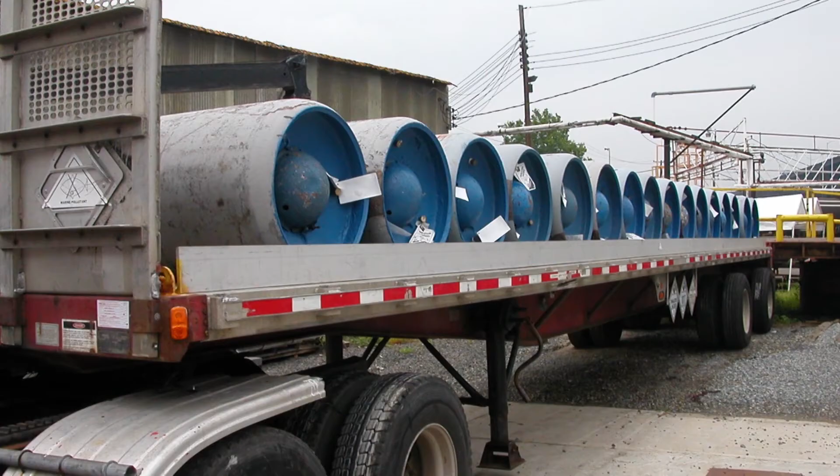It has two concave sides, one on this end, one on the back side, with 3 fusible plugs on each side. Fusible plugs are designed to melt out in lieu of overpressurizing the container itself.

There are 2 valves, a top valve and a bottom valve. There's a little chime area right here which has a bunch of information on it - tare weights, test dates, that type of thing. A lot of people consider that the top of the ton, but in essence, as long as one valve is in the 12 o'clock position and one is in the 6 o'clock position, the bottom valve is always designed to deliver liquid chlorine, and the top valve is always designed to deliver gaseous chlorine.

The ton container has 2 eduction tubes. The bottom tube is designed to deliver liquid, the top valve will deliver gaseous chlorine. A full ton container with 2,000 pounds of chlorine in it is about 80% full. The liquid comes to within a 1/2 inch of the top, so you can see how it would deliver gas, and this would always deliver liquid. Basically, that's what the inside of a ton container looks like.

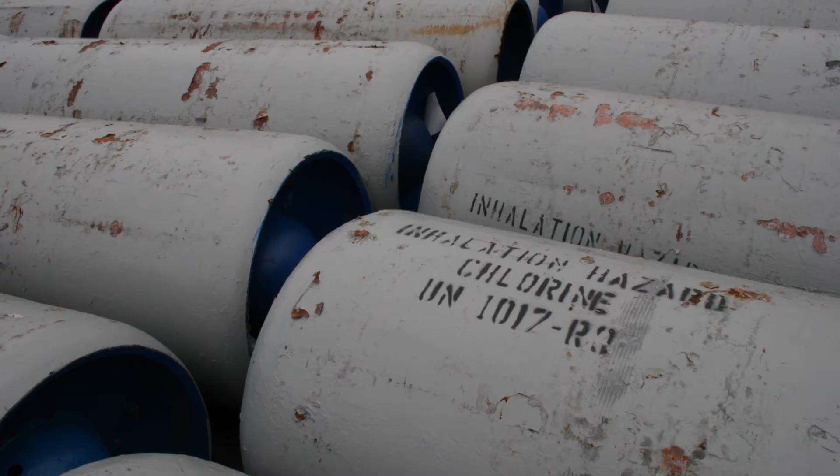In the chlorine industry, we call this a chlorine ton, but the Department of Transportation calls it a DOT 106A500. The point being, this container can be used for multiple gases - you just can't look at it and assume it's a chlorine ton. The same container is used for bromines, sulfur dioxide, and a whole host of other gases. The important thing to remember is to look for your stencil, labels, bills of lading - those type of things. You can't just assume automatically that it's a chlorine ton.

There's also a protective bonnet that goes over here. That's not part of the container - it's actually removed. All it does is protect the valves from being hit.

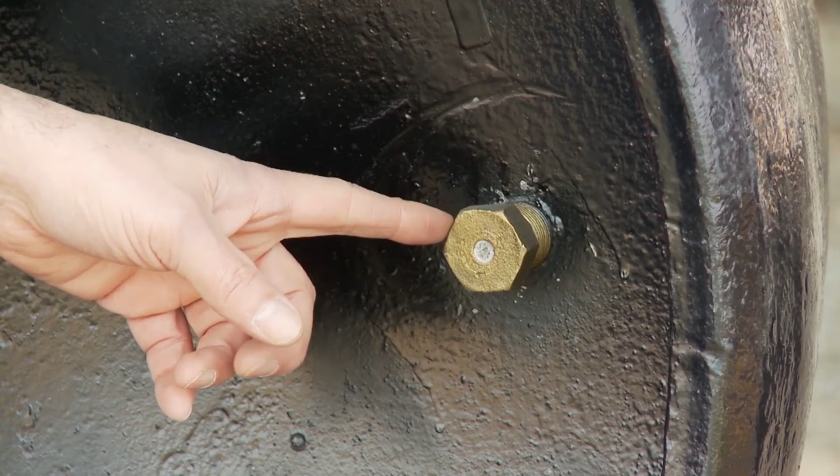Typical leak points on a ton container could be the packing nut, a valve not totally turned off correctly, or a spinner where the valve just keeps turning in a circle and won't shut off. Could be a leak in the back threads where it's threaded into the container. On a fuse plug, you may have the lead melted out, or a leak in the back threads where it threads into the container. On a very rare occasion, you may find a side leak in the side of a ton container itself.

All those leak points can be addressed with the emergency B kit.

On the ton container, there are 6 fuse plugs, 3 on one side, 3 on the other. Being it's 80% full, no matter how you rotate the container, they're designed so one fuse plug will always be in the gas phase. Obviously, if you have a leak, you want to rotate it to the gas phase so that you're dealing with gaseous chlorine versus liquid chlorine.

Liquid chlorine expands 460 times its own volume. In addition, liquid chlorine is about 29.6 degrees below zero, so it's pretty cold. So you want to deal with the gas, which is a whole lot easier than dealing with the liquid.

The fuse plugs themselves melt at 158 to 165 degrees Fahrenheit. It's actually etched right into the fuse plug itself. Really makes no difference - if you remember 158 degrees, you'll always be good to go.

If the lead is just melted out - now this lead in here, as you can see, it's about 3/8 on this side, the back side is 1/2 inch, so it is tapered. The lead is tapered, it will not fall out. It's going to have to melt out and be pushed out. It can melt from direct heat, but the design is that if the container heats up, as pressure builds, heat builds pressure, pressure melts the lead, lead comes out, and thus so does the chlorine.

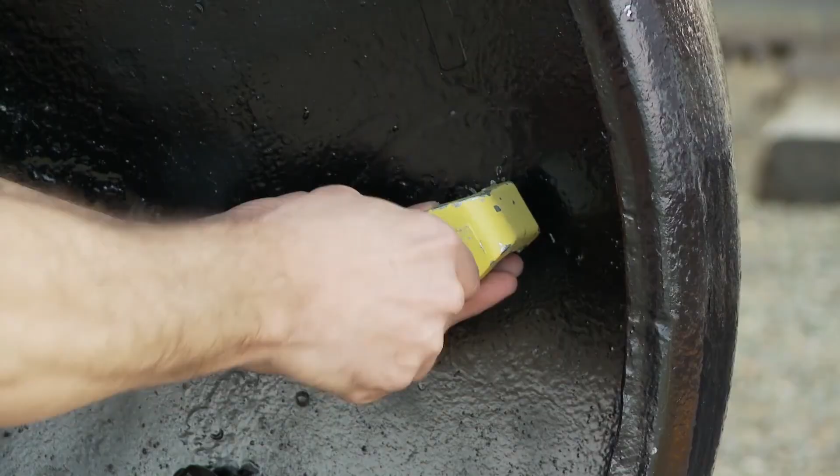When you put your kit away as a responder, you want to put everything away correctly in your B kit. This is how you want to have it, just like this. Now they have these little round gaskets that come in every kit. You can simply put this on there, slide it right over the top, tighten it, and stop the leak.

That quick, that easy. However, trying to hold this little thing when you're wearing a pair of rubber gloves is not the easiest thing in the world. So they made this little rectangular one, which looks like a stick of gum - we call it a stick of gum because it's easy to remember. You can hold this to the side, slap it on, tighten it up, and that quick you've stopped your chlorine leak.

If it starts to leak a little bit more, you can always tighten it a little bit more, or you can now put the hood on it just for extra safety.

If it's not flat and you have to put this hood on, it's pretty simple. Here again, you just slide it over the top, tighten it, and store it with your gasket on. It's easier to take the gasket off than it is to put it on.

There are two different size washers in these little boxes - one won't fit and one will fit. This is why you want to store it on your kit, so when you pull it out, you have the correct one right in your hand. Do a quick visual on it, make sure there's no cracks, any distortion. Put it on there.

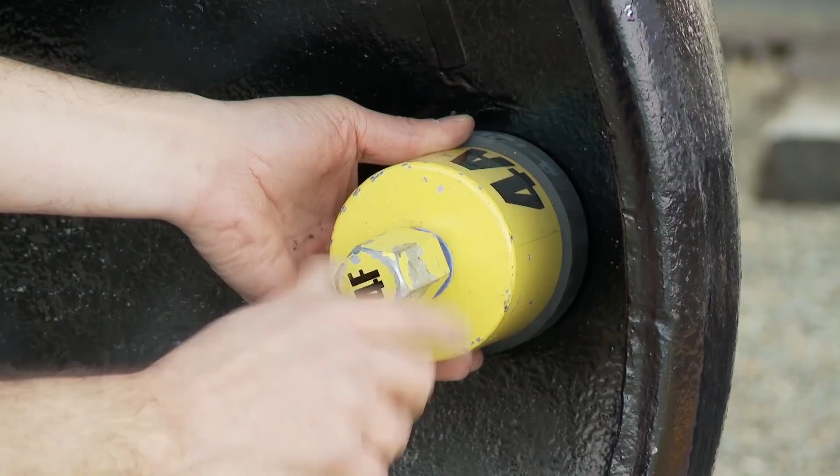You can tighten it up. Now, one thing you want to always remember - when you put this kit on, it's actually pulling on that fuse plug. So before you put that on, take your wrench and just make sure it's tight. You don't want to have a loose fuse plug, put that thing on, tighten it up, and have it pull the fuse plug right out. So you want to take your wrench and make sure it's tight.

If it's tight, you can use this wrench, or you can use the socket.

Socket with a breaker bar, righty-tighty, lefty-loosey. Put it in.

Industry standard will be for 3 to 8 threads showing on a 3/4 inch fuse plug. That is so you can tighten it up and still get this thing on.

Any kit you're going to put on there, you're going to find when you put it on, stopping 18 psi of chlorine and having it hold at 80 psi are two different things.

One way to look for that is to look for your auto refrigeration line. If chlorine has been leaking for even a short period of time, you'll start to see a frost level on there. That frost level is auto refrigeration. In addition to telling you as a responder that when you see that frost line, you know it's lower pressure, it also tells you the level that's in the container, so you have an idea of how much is in there.

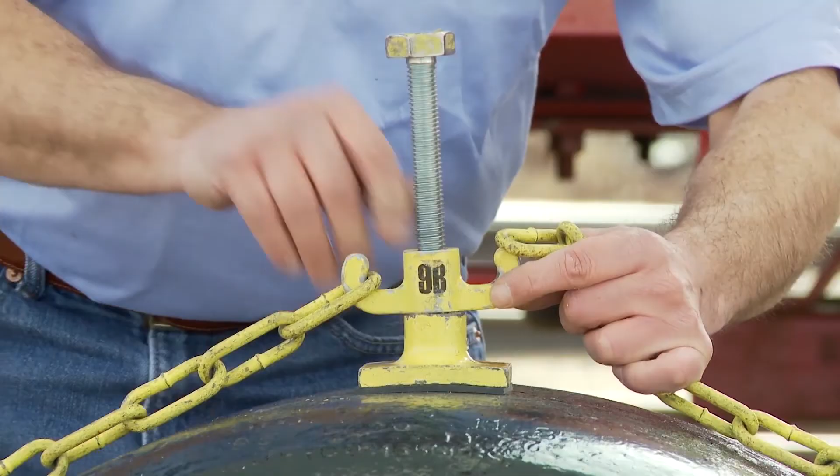When you hook your chain on, you want to have clean links. What you don't ever want to do is hook it on like this, where you got a link caught in a link, because as soon as you get it nice and tight, being a chain, as soon as it moves, it's going to come loose again. So get a nice clean link.

Another item for your kit is to put a little bungee cord in there, so when you put it across, the bungee cord holds it, so when you take your hands off it, everything doesn't fall on the ground. You're going to take your hood, put a little bit of tension on it, and then you're just going to maneuver it in place, just like we did on the A kit, and tighten it up.

Once you got it nice and tight, take your wrench, smack your chain a little bit, and then tighten it some more, because being a chain, it's going to come loose. Now you're going to tighten it until one of two things happen: either it stops leaking, or you're starting to compress the metal there. If you get that far, you're going to want to stop, and we'll deal with that at the end. But otherwise, wait 15-20 minutes, let it build up pressure, and tighten it again just a little bit. Then you start doing just little quarter turns.

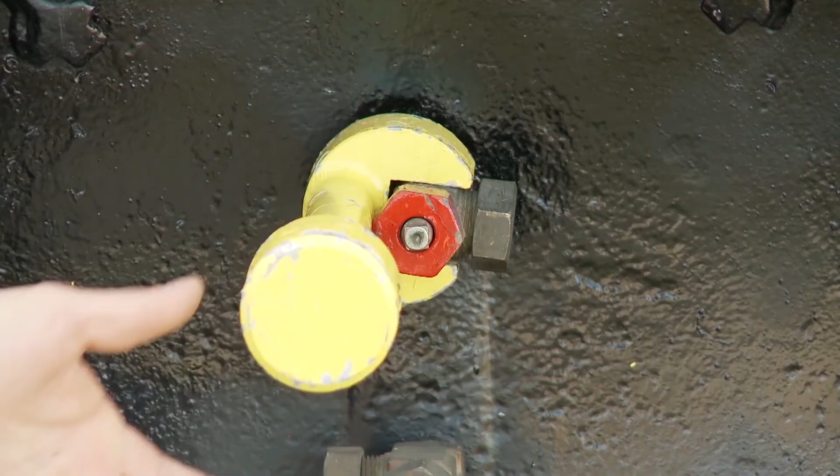If you have a leak in the back threads, you have what they call a crow's foot wrench. It slides on the valve. Take your breaker bar, righty-tighty, lefty-loosey. Everything on the container is righty-tighty, lefty-loosey. And you can just tighten it, okay?

Any container that just started leaking when it's sitting there is something you want to put a gauge on and check the pressure, make sure it's not overfilled. We've got 20% vapor space, but an overfilled container can build up a lot of pressure to the point where it can actually expand out the ends of a ton. So a container that's not hooked up and just sitting, you always want to check pressure on.

If your stem should come out, you have a drift pin. Stick it in there, take your big hammer. You've got steel on brass, it's going to seal pretty well. If your valve blows out or comes out, you can take your drift pin, but keep in mind you've got those couplings welded right behind there in the back. Chances are you're not going to be able to pop it in there and stop the leak. So just keep in mind this is probably not your first choice.

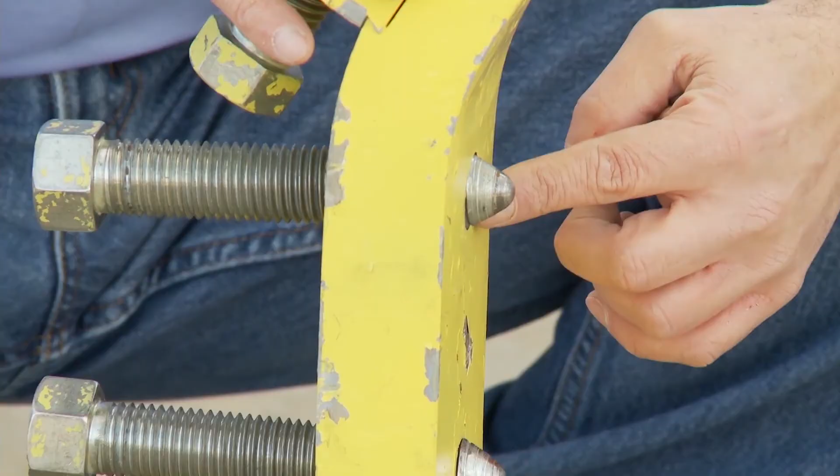When you put this away, you want to have it right on the first thread, just like I have it right here. You want to have these flush right here. You want to have these hand tight, back off a quarter turn. The object of it will be to line it up just like this. Okay?

Being all these tons are a little bit different, sometimes you're going to have to go higher, sometimes you're going to have to go deeper, but you're never going to have to go lower. So at the very bottom, you know you're going to line up. The reason you back off a quarter turn is if I have to go all the way to the top, you can see I can tighten that with my bare hand and it's not going anywhere. That's just with my hands. Quarter turn. Valve's going to be open.

When you set up your kit, of course, you can have your valve pointing straight up, which gets chlorine coming in your face, or you can point it straight down where it's out of your way, or you can point it straight out. Problem with straight out is if you have to put a yoke and adapter on it to bleed it off, you're not going to be able to get it on there. So you want to take good care on which way. Most people are right-handed. A right-handed person is going to be on this side. So sometimes you may want to rotate that thing down or just pre-plan it all the way out.

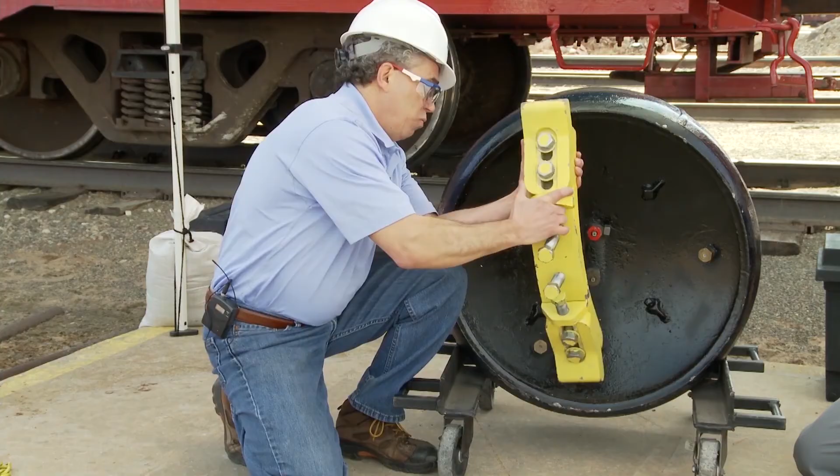As you can see, these ends are round. They're round for two reasons. One, so you don't cut your gloves, but they are round specifically for the container. You may encounter a ton container where it won't fit in there, you can't get it in. Not very common, but there are tons out there like that. That's round so that you can do this.

Take out your top bolt, loosen your bottom bolt so you can turn it, slide it in, and then lock it in. Put your kit on the exact same way. But you may encounter that where it will not fit.

Well, to sum it up, that's the B kit. It's a ton container. Important things to remember: you always work in pairs, you've got to have PPE. You're going to be dealing with a lot of sweating if it's auto-refrigerated. You're going to be dealing with cold, you're going to be dealing with slippery things. Those are all real-life things putting on the B kit.

With that said, you've got to practice putting it on. You can't put it on once a year and expect to be able to put it on. Fortunately, as responders, you probably don't have to put it on, which is a good thing. It says a lot about the industry. But when you do, you need to be ready. You need to practice PPE. Take your time. Put it on once, put it on right, correctly, tight. When you put it on, always wait 10-15 minutes and check it again in case you have to retighten it. Don't over tighten. Snug, you tighten till it stops leaking, but don't over tighten it.

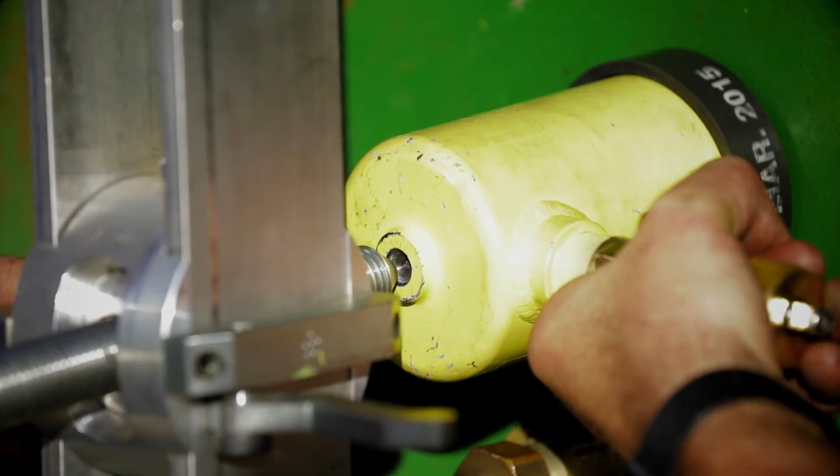Turn this knob. By turning this knob, you are basically disengaging the springs.

That's an obnoxious loud noise.

Once you've disengaged the springs, you just tighten straight in.

Again, you wait approximately 20 to 30 minutes until it comes back up on pressure. Check for a leak again. If it starts to leak, just go ahead and tighten it a little more. Let it rest, let it check it out.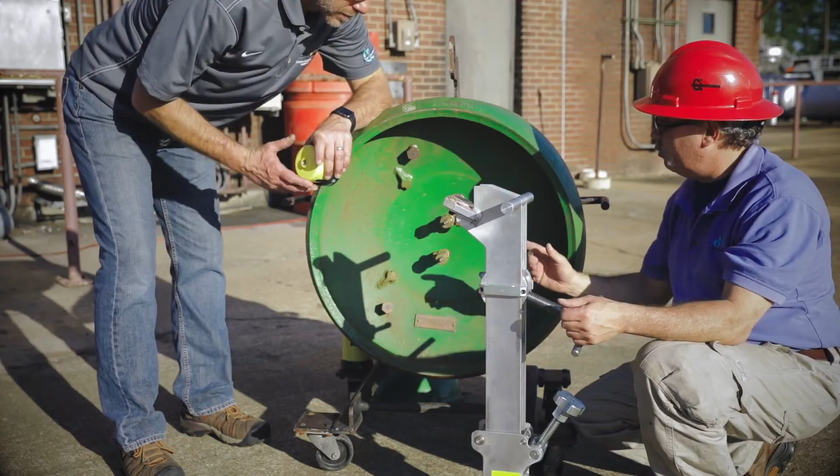You're good to go. To apply the patch over the fusible plug, it's fairly simplistic. This does tilt 10 degrees, which is exactly what we need for a fuse plug. The easiest way to put it on there is for him to put the fuse plug on there, the hood.

He then lines it up. Looking at this by holding there, he can look it up. I'll lock it in. Move it up to where I want it. At this point, you're probably going to need to screw it in a little bit so you can get a little closer to target it. Right on. Down. Good. Lock it.

Good. Once he tells me I'm lined up, I'm just going to lock it in. Don't forget your tool. As soon as I make contact with the back, I disengage my spring. And tighten straight in. Stopping the leak.

Adjust the cap screw into the yoke until the cap screw point extends slightly below the yoke. Use the paint scraper to remove loose paint and rust from the area. Test the integrity of the sidewall.

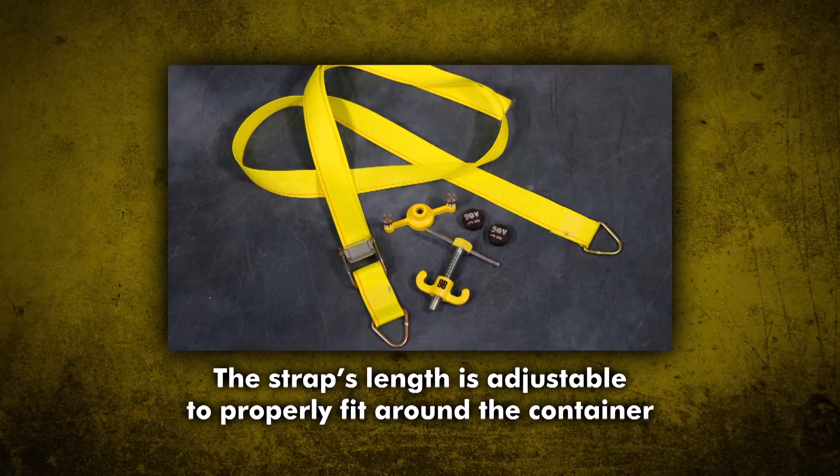The strap's length is adjustable to properly fit around the container. Slip one end of the strap under the container and pull it through. Align the strap with the leak in the container. Ensure that the strap is straight and not twisted.

If the container is not on a storage rack or rails, then place it on rails, planks, or a similar item to lift the container, or dig a trench underneath it large enough to allow the strap to pass through.

Position the gasket 9GV inside the patch and set it to the side of the leak. Center the yoke and cap screw into the depression on the top of the patch. Hook the strap to an ear on each side of the yoke. Keep the strap as short as possible.

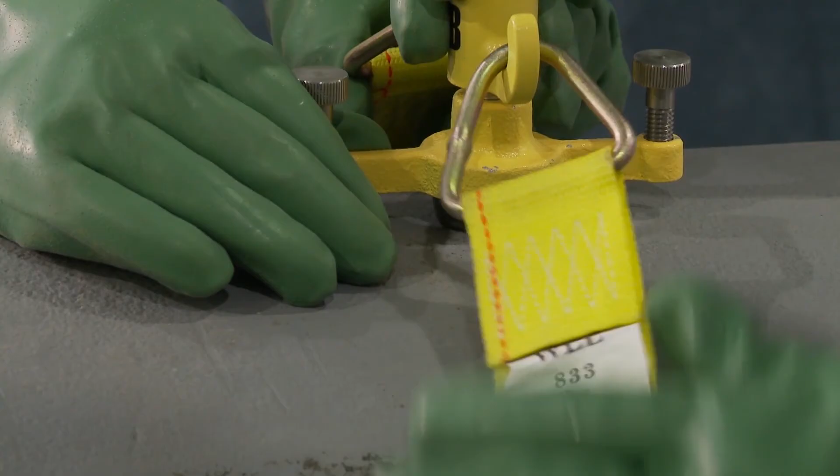Slide the patch over the leak. Tighten the cap screw 9C1 by hand until the leak stops.

Tighten thumb screws until they contact the container, but do not over-tighten. Adjust the thumb screws for stabilization only. Sealing pressure is supplied by the middle cap screw.

This stops the leak. Caution: if there is any evidence of weakening of the container wall, immediately discontinue tightening the cap screw. Test for leaks. If the leak persists, further tighten the cap screw. Thumb screws can be adjusted independently to apply pressure on the opposite sides of the gasket to stop the leak.

Our final module on chlorine tank car and cargo tank valves and the use of Emergency Kit C is presented by Randy Rowe. Randy is a veteran chlor-alkali industry expert and has trained many first responders. He is the Shipping and Emergency Response Manager for ERCO Worldwide.

Okay, we'll talk about when we first get on scene. You've gotten a call, the ChlorEP team hopefully is there. If you're there as a first responder, you're gonna have to be suited up. We're dealing with chlorine, always protect yourself.

Once we climb the side of the tank car, we're gonna have to have a way to determine where the leak's from, what part of the tank car is leaking. So we have to have ammonia. Ammonia gas will react with chlorine gas and make a white vapor cloud, so we have a way of determining even if we're ever on the right car.

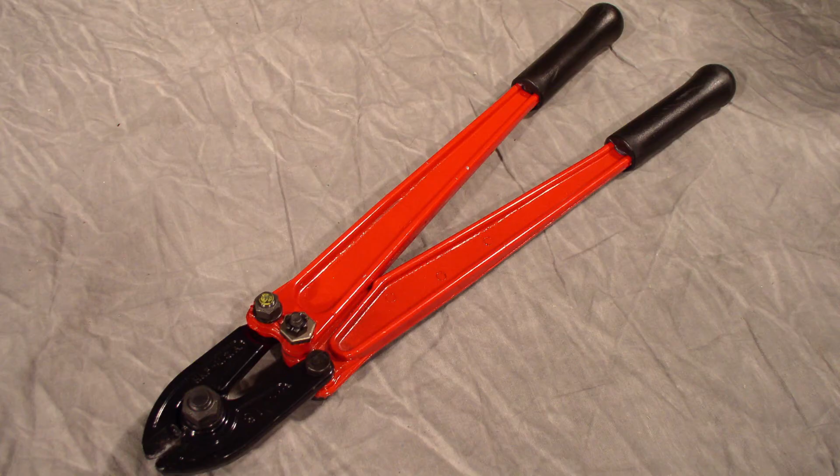If it is on the car, you're going to need to be able to cut that. Only one way to cut that—cable cutter. It's 3/16 inch stainless steel, so the buck knife ain't going to cut it. Need to have the cable cutter. So that, along with ammonia, is going up first trip with me.

I cut the cable, open up the protective housing, and we're probably going to have a mess. Ferric chloride forms inside this car. If it's leaking, it's going to have this brown, gooey looking stuff. So you're going to have a bit of a mess, but you got to try to figure out what is leaking.

Once you open the protective housing, you're going to see 4 angle valves with a valve in the middle—it's called the pressure relief device. We'll talk about the angle valves first.

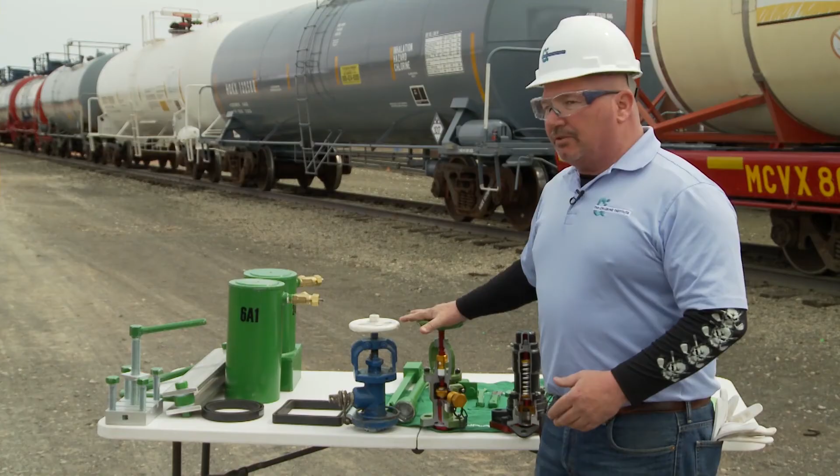There's really 2 types of angle valves out there: the ACF valve, which is a metal-to-metal seat, and the Midland Dayco valves, also a manufacturer of a soft seat valve. First, I'll explain the ACF valve. This valve has a metal-to-metal seat, has a 1-inch plug in it. There's a metal seat in there, has a packing gland, and the handle on the valve.

The easiest way to tell the difference between a soft seat valve and a metal seat valve is the handle—one has holes in it, one don't. The thing with the metal seat is tighter is better. These valves have been around for probably 70 years in service. Good valves serve the industry well, but they did leak—they were a problem. So tighter, better.

So with the holes in it, there's a couple of things that you can use, like a pipe wrench. There's part of the C-kit, which I'll show you a little bit later, that'll actually fit in here, and we can tighten it down tighter. So that's the biggest thing—figure out what kind of valve you're dealing with.

Now you have your ammonia gas with you, so you're going to have to check and see if we can actually find what is leaking, and then maybe we can repair it. Again, we don't want to put the C-kit on—that's the last thing we want to do. So what we like to do as responders is we work from the top down.

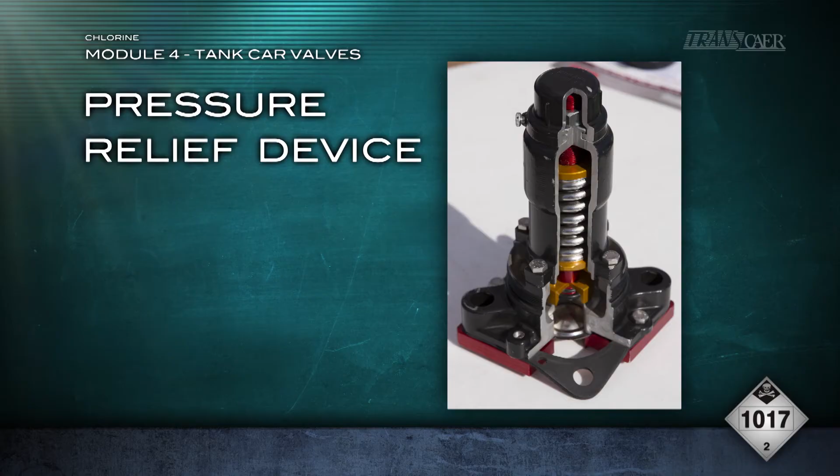So we talked about the angle valve. There's one valve. It's in the middle of the pressure plate. That's called the pressure relief device. These safety valves are set at 375 pounds.

All right? So when you initially made your entry, maybe you didn't find anything. But yet there's a telltale sign that there was a leak. There's ferric chloride built up inside the pressure plate, but we can't find a leak. We need to figure out what's going on. There's a tattletale on here.

You open that needle valve, and chlorine gas comes out of here. The valve had actually actuated. There should never be chlorine gas coming out of that needle valve. So we got a problem now. Remember, the pressure relief device is on the car for a reason. It's to protect the car.

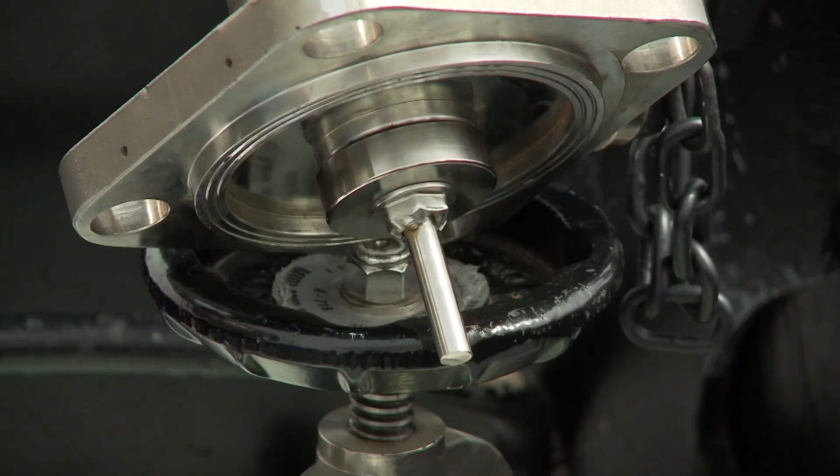How it functions is very similar to the valve we already demoed. When you turn this lefty-loosey, righty-tighty, as I'm opening it up you can see this stem on the bottom - the valve's kind of heavy - and it's actually going down. So what that's going to do is open up that check valve.

When I close it, it retracts. Even though I'm still going the same way as a responder, it's important that when I climb the car, closing that internal check valve means this valve has now become the secondary valve and the plug is third. Pretty unique design.

And you'll see them out there. You'll note that inside this protective housing, we're missing a valve. There's 3 angle valves on here, 1 PRD. The only reason that was done is to reduce leak points. It's an option - you can get the 4-valve system or the 3-valve system.

The other thing that's changed on this car is the PRD. I explained how the PRD works there. It's still a 375-pound release pressure.

The big difference is that the rupture disc is no longer part of the PRD - it's actually part of the pressure plate. The rupture disc is still there, it still releases at 375 pounds, activates the PRD, still functions exactly the same.

The big thing is in a rollover, you can shear this PRD off. Again, no chlorine comes out because the rupture disc will hold it.

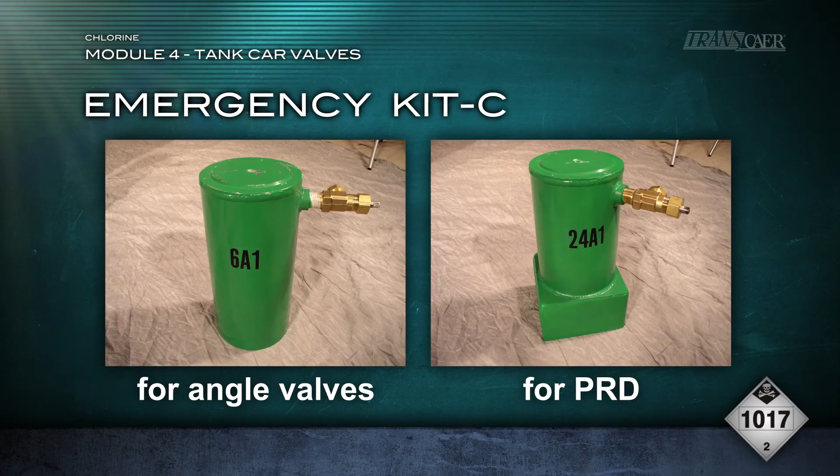That gets us to the main part of the C-kit. You'll note the 24A1 has a square bottom and the 6A1 round. If you look at the valves, round bottom, the PRD is square bottom, all right? These things are pretty heavy, so determining what you're going to do before you go upside a tank car is pretty important. Only take what you need.

In front of that, you'll note the Viton gaskets. Nice, flexible, make sure there's no nicks in them. They'll fit on the bottom of the can. They fit really tight, so once you have them on, you're good to go. They shouldn't fall off, but also check for nicks, cracks, wear.

Only use them once. If you use them in an incident, don't use them again. Get yourself new ones, all right? Keep them for practice, right? And again, the round one goes on the round can.

I'll show you how to put this on in a minute, all right? Just going through the parts. Here's the strong back that's going to hold this C-kit in place. Sits on top, this is the back part of it. I'm going to demo this in a minute. Strong back goes over the top, hooks in the portholes, and we can tighten it right down. So this is all part of one kit.

Building the additional toolbox, one of the first things we're going to need is liquid ammonia. You can buy it down at the grocery store, any grocery store is going to have it. You cut it though, you keep it in a container that's sealed tight, otherwise you're going to get to it and it's not there, it evaporated on you. Cut it 50%, keep it in a tight little container.

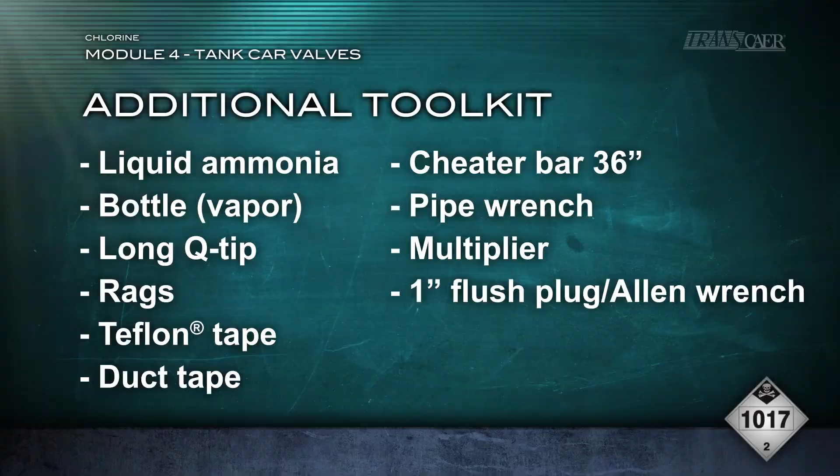We talked about cutting the plug off to get it out of the way. Another thing that I carry in my additional toolbox is a 1-inch flush plug, they're called. You can buy them at any hardware store. This is a 1-inch standard thread. A 1-inch flush plug looks just like that, but instead of having this on the end of it, it'll have an Allen head hole in it. So what I can do is take my 1-inch plug, put it in there, take the Allen wrench, again another part that I have to have in my toolbox, tighten that up and it'll become flush.

I can put my C-kit over the top of this. Now my C-kit becomes my secondary containment. If the thing's leaking, I have to plug in there and I put this over the top, now I've got secondary containment. So instead of not having a plug in there, I can put the flush plug in there.

We talked about knowing why, before we recap a car, we've got to figure out what's going on with it. We have a problem with a PRD, we need to know pressure. Well, again, the C-kit doesn't have a pressure gauge. Another thing that I need in my toolbox. We talked about what the pressure rating of the PRD is, 375 pounds. So obviously a 200-pound gauge is no value to me. I need to get a 500-pound gauge. It has to be compatible with chlorine gas, right?

That should be part of it. Doesn't need to be a certified gauge because we're just looking about. I need to know about the pressure. If it's 200 pounds, it's not a problem. If it's 350, I'm not capping that. So get me a 500-pound gauge, and of course I have to have a way to connect it.

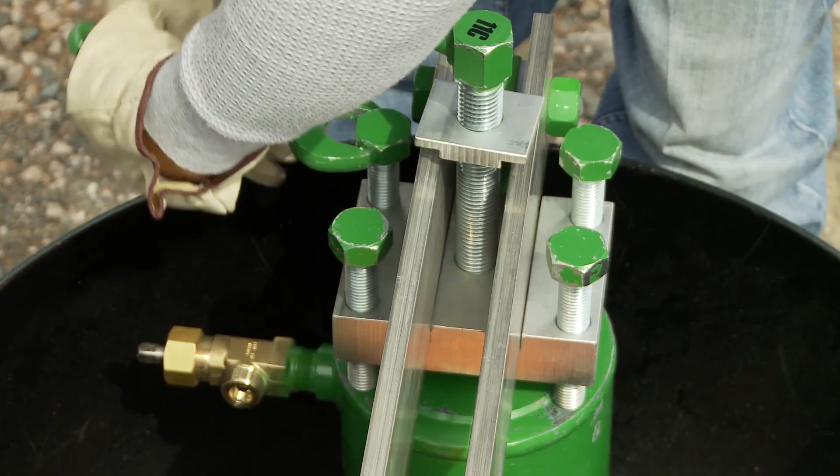Once they're hand tight, he's going to take the wrench 200C and start tightening down the bolts. You'll note that he's going in a star pattern, one side to the other, back and forth, and you're going to do this several times because that Viton gasket is going to start squeezing down onto the pressure plate. It's really important that you do it exactly the way he's demonstrating it. A little bit on each bolt, a little bit at a time. Keep cranking it down till you can feel it start tightening up.

That Viton gasket is a pretty pliable gasket, a pretty tough gasket. It's pretty hard to cut them. You got to crank pretty hard to cut them. So we're going to get it down there nice and snug, and he's probably getting real close to where he needs to be. He's got it nice and snug.

Okay, once you got it all tightened down, the next step is we need to shut that valve. It's important now because once you shut that valve, we're going to start building pressure up. You'll note he stays off to the side. He's going to shut that valve and the pressure starts building up in the can immediately. Make sure your body ain't over the top of that. Could have 200 pounds of pressure in that can pretty fast. That thing comes loose, you never know, so stay off to the side. It's going to tighten that down using that same 200C wrench.

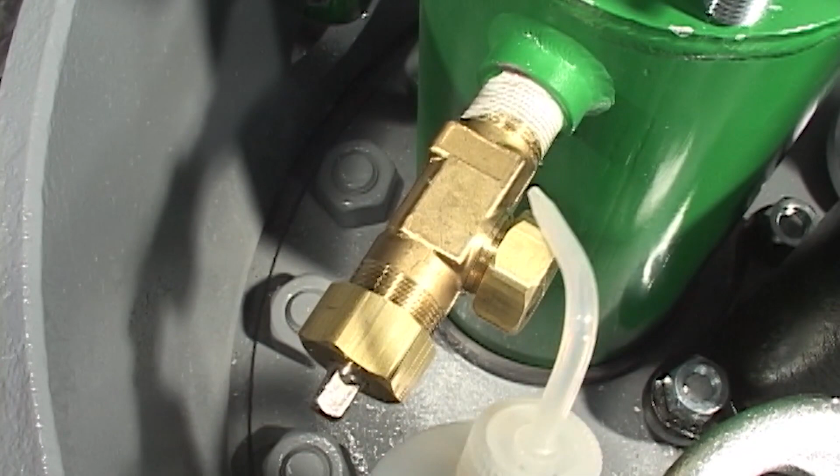Once he has that tight, we're going to grab that ammonia bottle and go around, make sure that we got nothing, no leaks. Got no leaks, we're good to go. The incident commander is going to ask you to go back probably 30 minutes, 15 minutes later and check and make sure that you're still leak-free.

Climb the car, you got your ammonia, check around the can, check by the valve, make sure nothing's leaking. If it is leaking, we're going to need to relieve the pressure off that. And again, we got the valve positioned so that we can actually use it.

Don't work on it when there's pressure on the can. Sparge it off, take the pressure off, leave the valve open, go back, get the wrench, the 200C wrench, and you can start tightening down on the 4 bolts on the top again. Tighten it up, go through the whole scenario again, shut the valve, check for leaks, and it should be good. That's the way it's mounted.

Device 6 will not fit on some of the alternate valve designs. Device 24, traditionally used for the pressure relief device only, will need to be used instead. Also, an additional tool, a 1-inch threaded stabber pipe not included in the C kit, will be needed. Loosen and remove the 3 cap screws securing the valve outlet flange to the valve body.

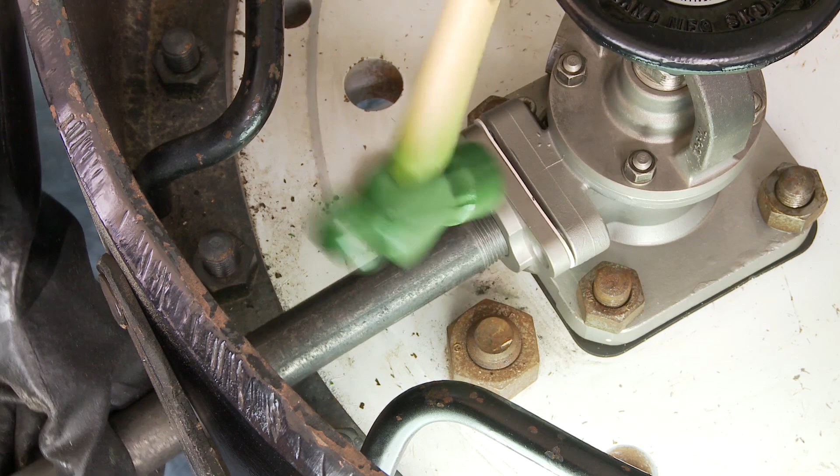A 1-inch threaded stabber pipe needs to be inserted through the housing port near the leaking valve. Thread the pipe securely into the valve outlet flange. Tap the stabber pipe on the sides with a hammer until the valve outlet flange is loosened. Remove the stabber pipe with the outlet flange attached.

Hood 6A1 cannot be used on these valves. Instead, 24A1 must be used. You may have to install the emergency C-kit hood 24A1 over a pressure relief device with a telltale valve and plug. This telltale valve will either need to be removed or rotated to allow clearance for the installation of the 24A1 hood.

One of the things that I didn't talk about that we should is the Chemtrec network on the side of the tank car. Great big yellow sticker, can't miss it. It's a Chemtrec network that'll dispatch our CHLOREP team. We'll respond to all chlorine incidents. We'll get a hold of you on scene. We can help you over the phone, try to figure out what's going on with the tank car. Meanwhile, we're en route, and we also respond. It's not a question, we're on our way as soon as that phone rings.

The last thing we want to do is put this C-kit on. We talked about how to find leaks and how to stop leaks, but once that C-kit's installed, this tank car is not going anywhere. It's going to take a one-time movement approval, and it's probably not going to happen. The best you'll do is be able to move it a few miles, maybe to a production facility to work on it there, but you're probably going to work on it where the tank car is. So we try not to use it, but you know how to install it.